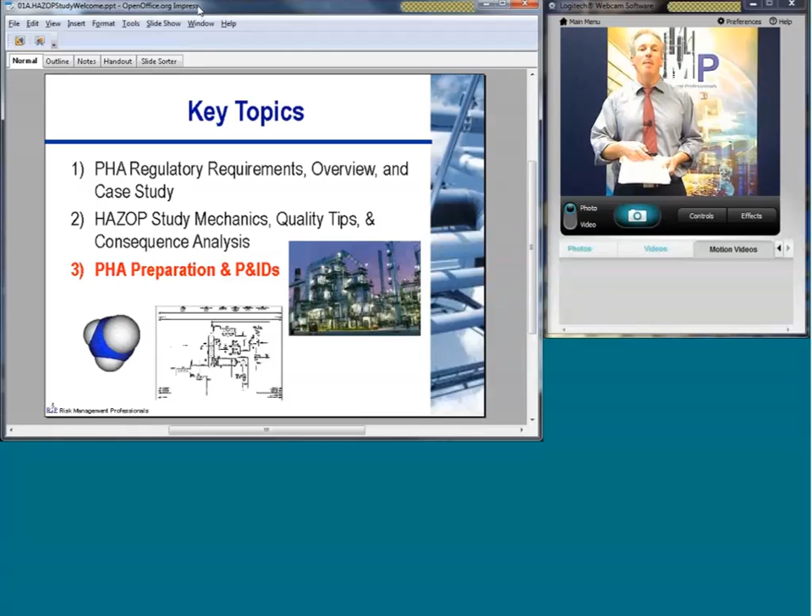Upcoming topics will include scenarios, workshops, facilitation tips, more workshops to really have everything come together, how to integrate layer of protection analysis, safety instrumented systems, safety integrity level issues, QRA, and pulling all that together for an overall HAZOP study that integrates with a lot of the other things you may have to do for an overall safety management systems program. Also want to talk about revalidation, that's another real key issue.

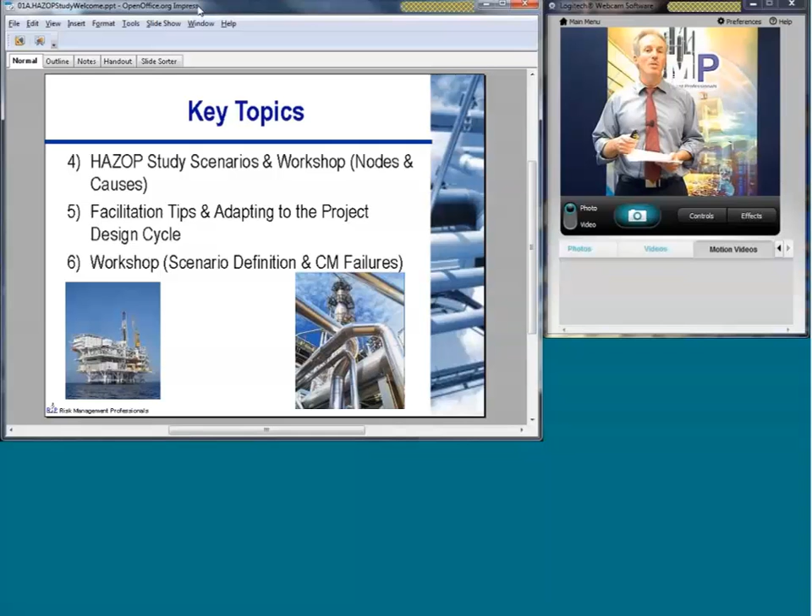That'll be coming up in Module 9. Team facilitation, we're going to get something very interactive going for Module 10. Then Module 11 will look at a lot of key issues that classically hadn't been done very well: human errors, human factor issues, facility siting.

Also, how do you integrate hazard and operability studies to various stages of the design cycle for a plant. And also, Module 12 will close with a lot of specialty items. A lot of people use double jeopardy inappropriately - how do you integrate those concepts into HAZOP studies, looking at multiple consequence categories, etc.

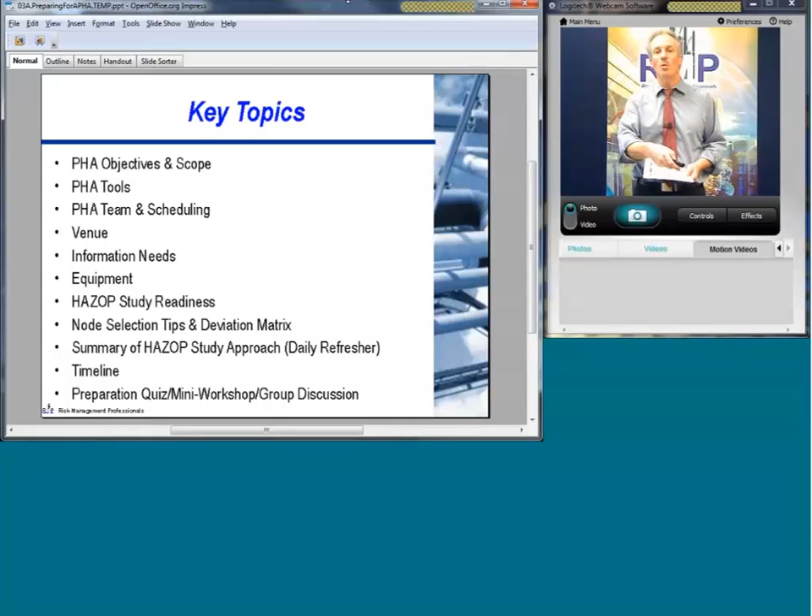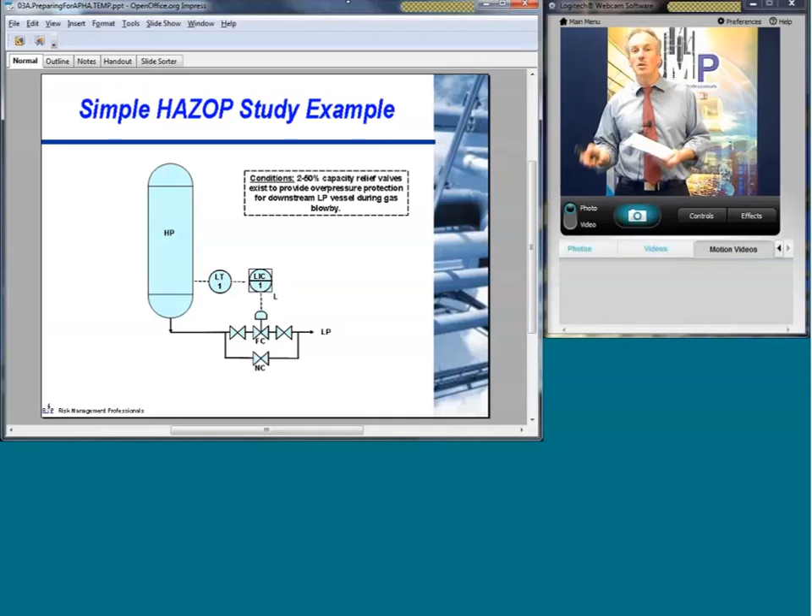So let's overview. I want to give you a big picture again so we don't lose sight of where we're going with the hazard and operability study. Again, you've designed a system, you use piping and instrumentation diagrams or some other mechanism to design it to achieve a certain function. Like I said, P&IDs, which Judith will talk about more, emulate the function of the system. So what you want to do is translate that into looking at it another way and how it can break or how can you fail the system.

Use a deviation matrix as we talked about before, apply various guide words, combining no with process parameters like flow to get deviations like no flow, that can lead you down a path of challenging the system and uncovering potential vulnerabilities. The hazard and operability study has a rhythm to it.

There's a very systematic approach to making sure that you ferret out potential hazards, segmenting things in the form of nodes, applying process deviations, looking at various causes that can go wrong, looking at the consequences of those causes, and developing a scenario so you can understand how likely the event is, how bad the event is, and gauge with the team whether the safeguards are adequate or whether you have a vulnerability that you need to address.

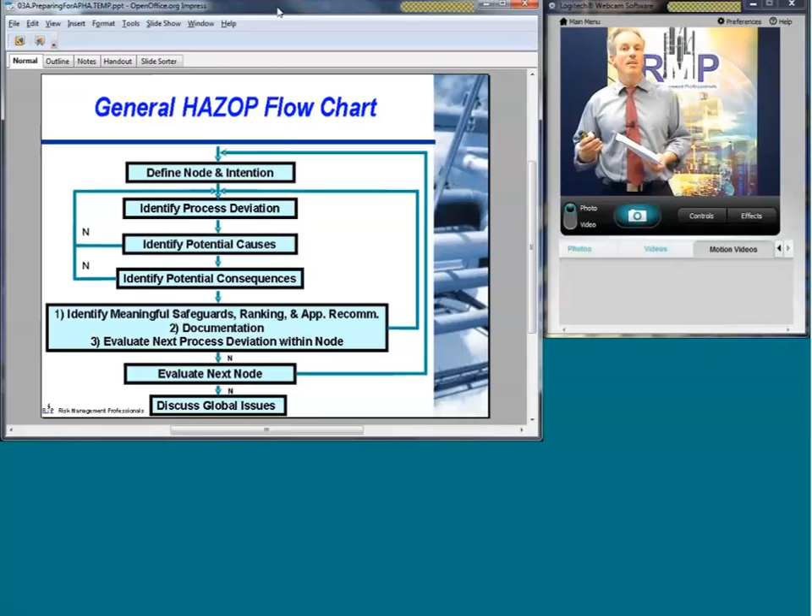It gets documented as part of a table typically, where you list out the causes, consequences, safeguards, and any weaknesses, or any recommendations to address potential weaknesses.

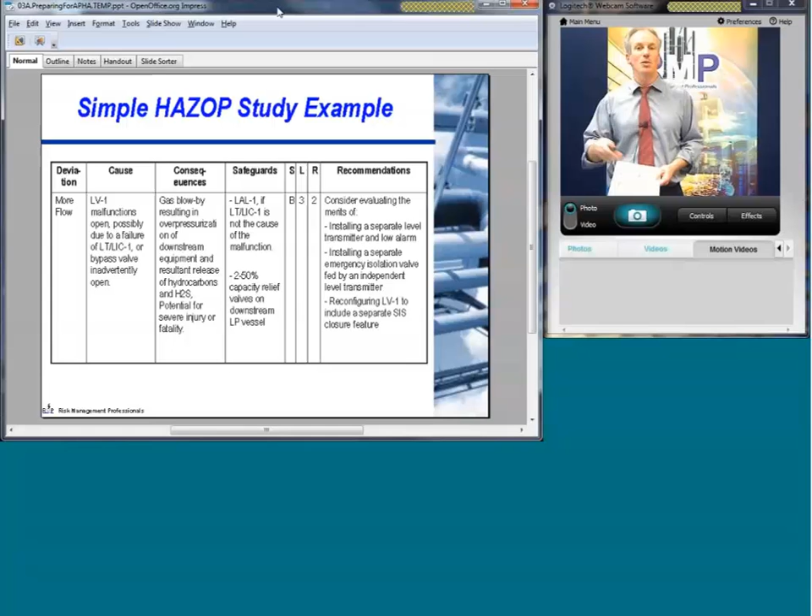So what you're trying to do is use that design information, how the system works. You're using a tool like one of the process hazard analysis tools, like a HAZOP study, to challenge the system, to make it break on paper, of course, and identify what potential weaknesses there may be so you can fix that. So you're looking at causes that can lead to safety or environmental hazards.

You're trying to recommend changes or things to address potential vulnerabilities or weaknesses, and then you're trying to provide documentation that provides background for those recommended actions. So that's the objective: you're trying to go from design information, use a PHA technique, challenge the system, and uncover weaknesses.

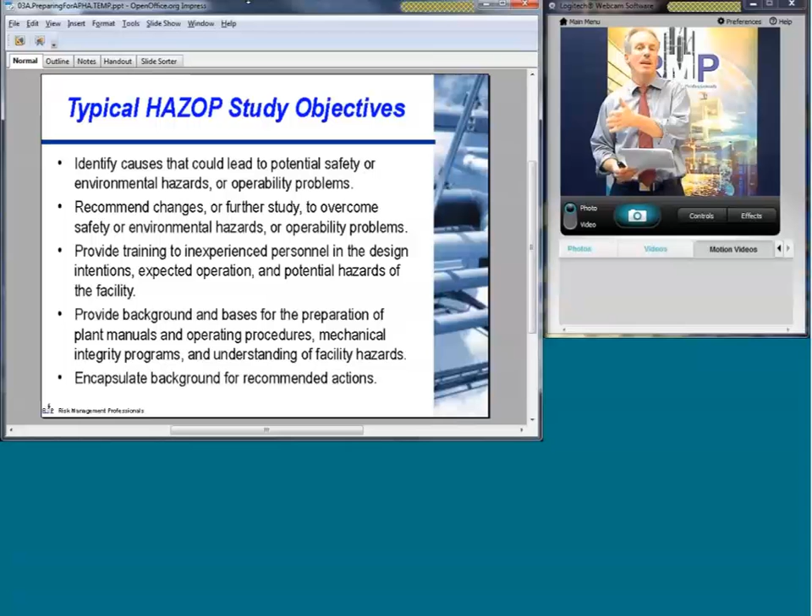So the whole theme for this is how do you do it successfully? Well, half of success is preparation, doing things up front so you can effectively use your team and effectively uncover weaknesses. If you go into a PHA of any sort, especially a more complex one like a hazard and operability study, and you're not prepared, you're going to be wasting a lot of time. You may not get the results you want, and you may not have uncovered potential vulnerabilities that can wind up injuring somebody, causing major plant damage, or having a significant impact on the environment.

So to achieve this, preparation helps you get a high-quality PHA. It helps you effectively utilize the team, and it can also make sure that your session time is well used.

A good preparation for a HAZOP study not only can improve quality, but it can also decrease the overall amount of session time that you may be encountering. So let's look at the key steps for preparation.

First of all, it's defining the objectives and scope. If you don't know where you're going, how are you going to get there? A PHA can be done at a very high level early in the design stage, and I did one for a hydrocracker. We flew through it in just a couple of days, looking for high-level issues very early in the plant design stage so you could make major changes in a very cost-effective fashion. That was the objective.

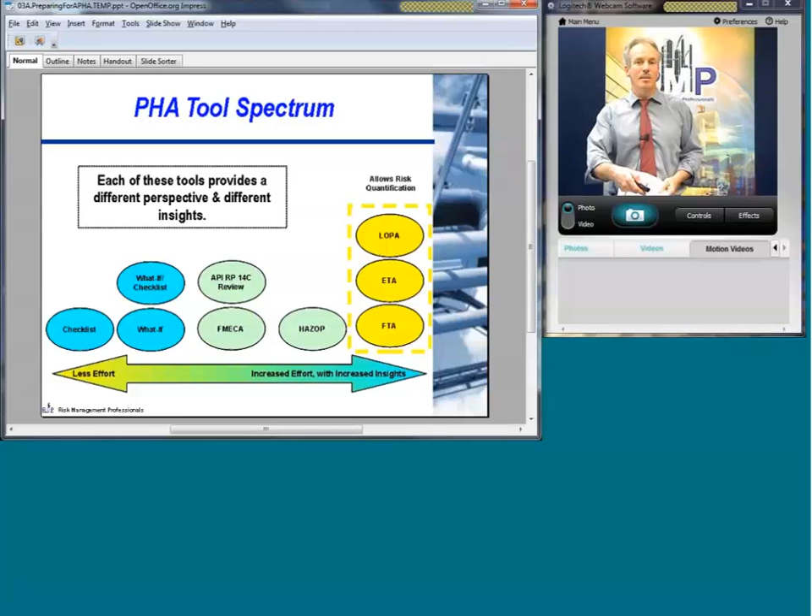Okay, step number 3, after you define the objectives, you know what tools you're going to use so you can start arranging the tools, is the team. The team is where it's going to make or break you. Getting the right people, having the right expertise there is absolutely critical.

There are regulatory requirements with who has to be there, but even beyond that, don't just shoot for the minimum. Think about what's needed, what are the capabilities of the personnel. Each individual on the team is going to have a certain role and responsibility. We'll talk about that in a second.

And it's important. These are some of the busiest people. The best qualified people are going to be the busiest people. So you're going to want to schedule them early, make sure they're calendared, and that can be a real challenge sometimes. And also, you've got to let people be aware that they have to be there for the entire time.

A team session for a PHA like a HAZOP study, you can't have people coming in and out. If people miss key parts of it, they'll just come in later and start asking the same questions, or you may be missing their critical insights at a time when you really need their support.

So what does the team look like? From a regulatory requirements perspective, you have to have representatives from engineering, operations, and maintenance. You have to include a person who has knowledge specific to the process being evaluated. It doesn't help you too much if you're working on a hydrocracker and then you've got a brand new engineer on your team who's only worked on your wastewater treatment system, that just isn't going to fly. It's not going to be a good use of time. Instead of having a robust and worthwhile effort that provides good quality results, you're going to end up wasting a lot of time and maybe even having to redo it.

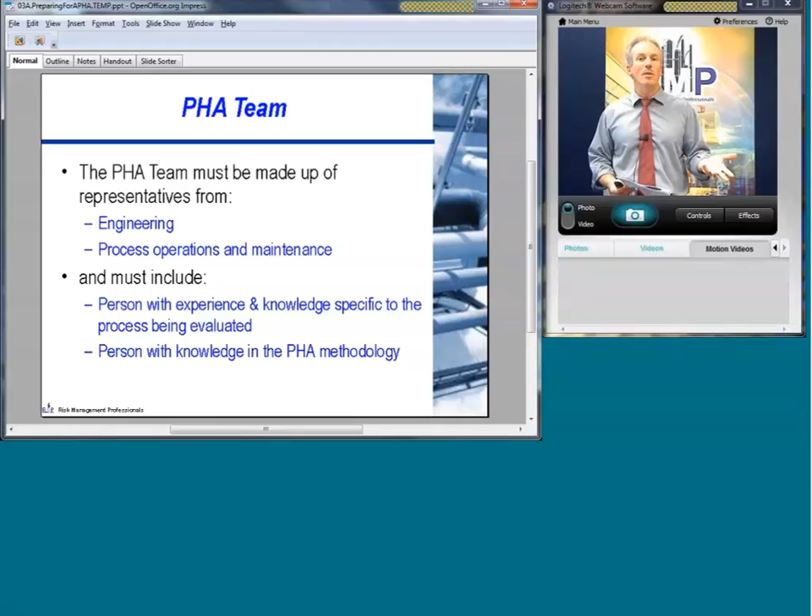And of course, at the bottom, somebody knowledgeable in the PHA methodology. We're applying hazard and operability studies consistent with a lot of experience base that we've acquired, and also consistent with CCPS guidelines for hazard evaluation procedures. This is the mainstream of activity. However, as engineering consultants in the area where we get out and help a lot of people with HAZOP studies, we see all sorts of applications that'll make your eyes pop out. You won't even believe what people have done and called a HAZOP study or called a PHA. You've got to have somebody who knows the methodology, and we talked in the last course module about using endorsed methodologies, so that you've got an analysis that's robust and meets regulatory requirements.

Key people on this team, as I mentioned, you've got to have a process or project engineer, operations, maintenance, and a PHA facilitator. Those are the ones in blue. They've got an R after them as required by regulation. These are the core members of your team. But if you're organizing this and you're facilitating a hazard and operability study, you've got to make sure that you've got the expertise that you need to get the job done.

A larger effort, you'll also want a team recorder or scribe. We'll talk about that in a second. They can be pivotal to making the team sessions go smoothly and maintaining momentum. An instrumentation specialist may be needed. Safety and fire protection experts and other expertise may be really critical for your PHA team. Based on the objectives, you have to decide what you need.

Also, optimal team size. Sometimes it's tough getting an operator and an engineer at a plant site who's got time to sit through these. That's a minimal amount of individuals. That's even a little on the small side. You usually want an optimal team size of 6 to 8 people with various expertise and people who have the horsepower in project management or in operations to endorse projects or give valuable insights.

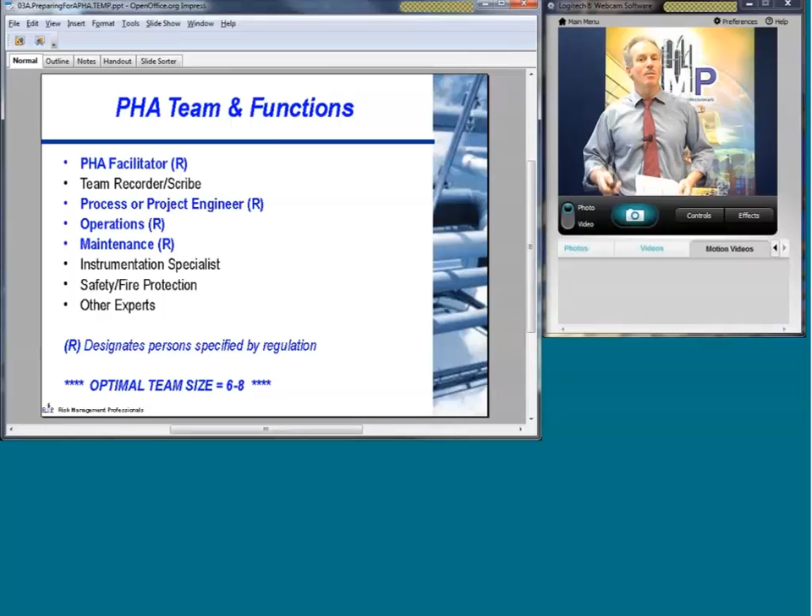If you get too many people on the team, they spend a lot of time interacting, they bring other agendas on board, and you have a harder time reaching consensus the more people that you bring in. So unless somebody has specific expertise that's needed, they really shouldn't be present for these PHA team sessions. I have had sessions that have looked at very acute, very critical processes that had a lot of people's attention. I've had upwards of 30 people in a HAZOP study. It's very challenging trying to manage that, trying to reach consensus, and trying to move that forward. So unless somebody really needs to be there, you just don't want them as part of the team.

Key team members, their roles, the facilitator. The facilitator has to organize. They can have good technical knowledge. In fact, we'll talk in a few minutes, it's actually very important to have good technical background. But their primary responsibilities are to organize and push the team towards finding those vulnerabilities or weaknesses if there are any.

The facilitator usually ends up, because they have the vision for what has to happen and for the job to get done, being the one responsible for preparing, making sure the objectives and guidelines are met, scheduling, location of facilities, team selection, all the things that we've been talking about and are going to talk about a little bit more. The facilitator needs to provide team training. When you get a fresh team, you don't know what kind of hazard and operability study approach that they've seen before.

They need to make sure that the team understands the objectives, and all these things are conducive towards making sure that you can maintain schedule and keep momentum. If you spend too much time on things, you find that the team just goes brain dead. They zone out, they're not contributors.

Maintaining momentum of the sort where they can really think and flush out potential issues is a critical job for the facilitator. The facilitator can also support tracking of actions, and also qualifications, experience, and background. Training, of course, is critical to make sure you've got a robust and high-quality PHA.

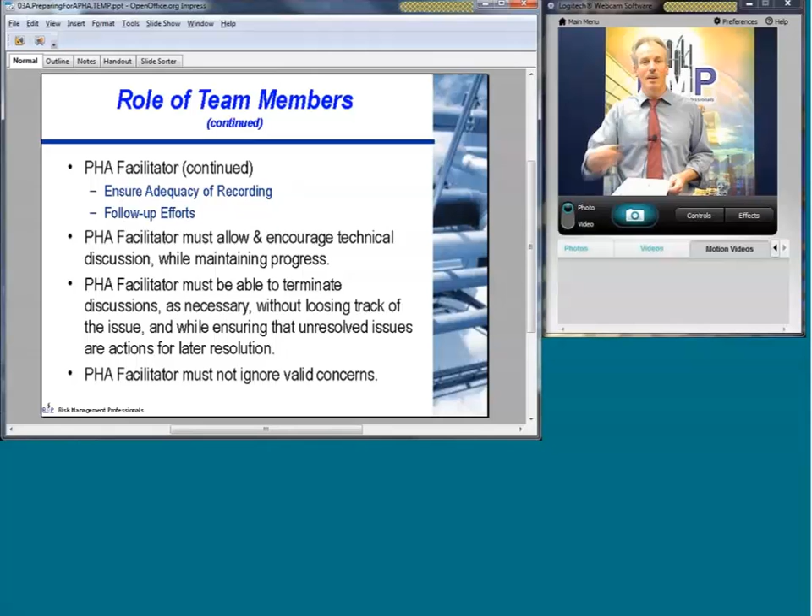What is the scribe doing? Well, a lot of people say, let's just grab a secretary. But the fact is that they have to be qualified and understand what the team is doing, because they're going to be translating all these discussions into the documentation.

Now, are the team notes the final documentation? Usually not. Usually you want something a little more robust. You're double-checking tag numbers and making sure that quality is there so you can understand and decipher it later, in case you need to do updates to support your management of change program or future revalidation efforts. So doing a good job on this documentation and having a good quality scribe is very important.

Other experts that are going to be there have to have suitable qualifications and experience. Like I mentioned before, you don't necessarily want to get somebody from another process unit who has no idea what you're talking about. That's not going to be helpful, and you're just going to have a lot of follow-up items, spending a lot of time trying to sort through things you don't understand.

What about vendors? A lot of times you get skid-mounted packages, like the lube oil systems I mentioned before, where it's very simple. How many lube oil systems are there out there? People should know how to design it. Given the objectives of the project, you have to decide: do we want to do an in-depth evaluation of that, or do we want to trust the vendor to give us a package that's very reliable and has no weaknesses in it?

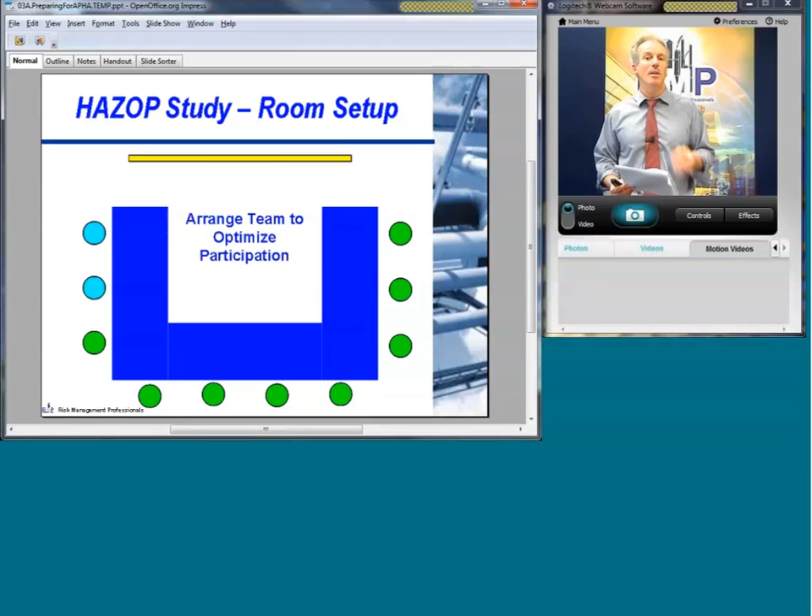Step number 5, getting key information together. The focal points for PHA, because you're going to be looking at design and key design information, are your piping and instrumentation diagrams, your P&IDs, and also process flow diagrams.

Their accuracy, doing a good job up front, is critical to the success of the HAZOP study. Let me repeat that: the accuracy of P&IDs and process flow diagrams is critical for the success of your process hazard analysis. People can't just grab the P&IDs from 5 years ago and go, let's go HAZOP.

Somebody needs to field verify them, make sure they're up to date, make sure they're accurate. Otherwise, what you're going to do during your HAZOP study, instead of uncovering weaknesses and using your expertise effectively, is have a ton of discussions about, 'gee, is it like that now?' or 'I thought we removed that tank 3 years ago.' Those kind of things really can derail a HAZOP study.

I've been in HAZOP studies where the drawings promised were correct - I was told they were field verified. And I'm asking questions, and we're documenting things, and 10 minutes into it, I'm looking, and they're just blank stares. Somebody finally says, 'we removed that vessel 2 years ago.' These kind of things are just an unacceptable waste of time. It's unacceptable if you're trying to achieve a quality PHA.

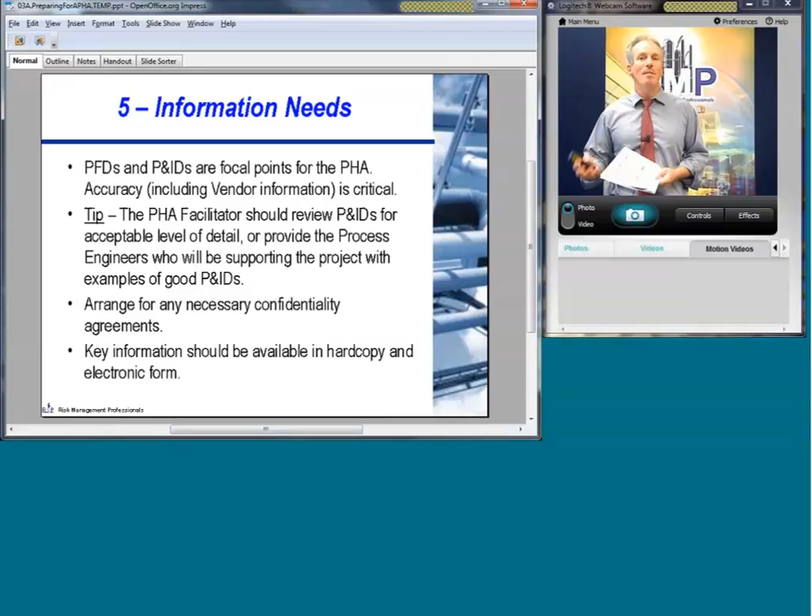This is a nice little checklist of what I call desirable information, or things that you may want present in the room or make copies of for the individual team members.

P&IDs are fine. As I mentioned, accuracy is critical, but here's a tip: if they're not 100%, if there are minor differences that you can clearly communicate during the HAZOP study, let it go. Have a master copy on the wall of large-size drawings, mark it up, have the process engineer mark it up. Everybody can look at it, understand the little change, and factor that into your HAZOP study, and then have those drawings become part of your documentation. That's an acceptable way of doing things. The proof of the pudding is whether you can uncover vulnerabilities and are doing a good, thorough job.

Also, the H means high priority. On the second bullet, all these H's are high priority. Process flow diagrams, and other high priority items, are site layout drawings.

Even more importantly, for older facilities, we find a lot of interesting insights when, after going through the cause-by-cause HAZOP study, we do an overall fire protection review by laying out the site plan and talking about where a major fire might occur, where the monitors are, where the evacuation points are, where the safe assembly areas are—site layout drawings really help a lot with that. For older facilities, the paradigm of good practice changes over the years, so you're going to find significant vulnerabilities just with a good, thorough inspection of your site plot plan.

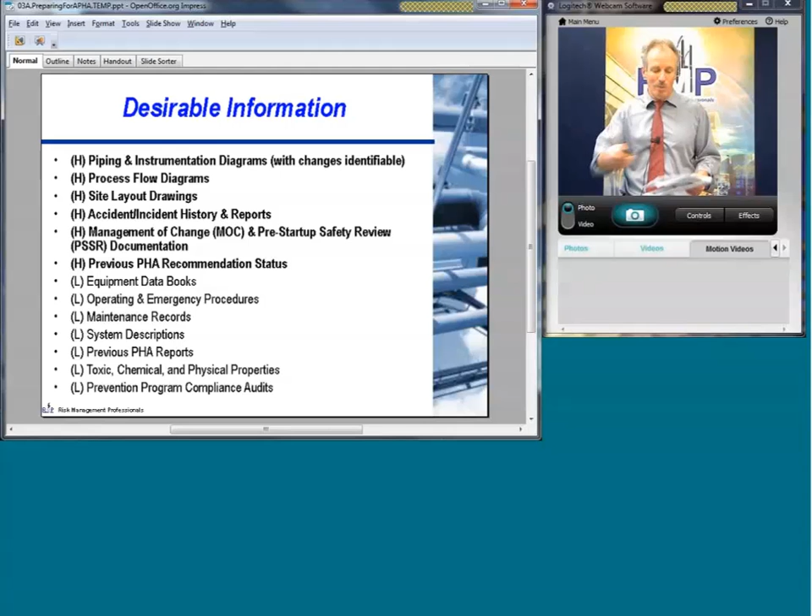So those are a lot of the key information needs that you'll want to have requested, gathered, and available as part of your preparation activities.

Step number 6 is equipment—basically getting all the pieces together so that things work and you have all the tools that people are going to need during the sessions.

One of the considerations is electronic communications. Over the past few years, when you're having a tough time getting busy people together for your HAZOP study, electronic communication packages like GoToMeeting and WebEx—you've probably seen those advertised—along with a number of other packages, can be used very effectively to get groups in different physical locations. We've had a lot of success running very good, high-quality HAZOP studies by setting up interactive video and interactive computer screens that everybody can see. You may even run two at once—one to look at the P&IDs, and one to look at the HAZOP study session notes.

So there's a lot of good things you can do that are out there. However, beware, this involves computers. Computers always look for opportunities to foul up, and it involves technology, bandwidth, internet connections, and a lot of logistical items that you want to make sure get prepared up front.

This is one area especially if you're trying to arrange something like that, you want to make sure all of the I's are dotted and T's are crossed with respect to the details needed for setting this kind of system up.

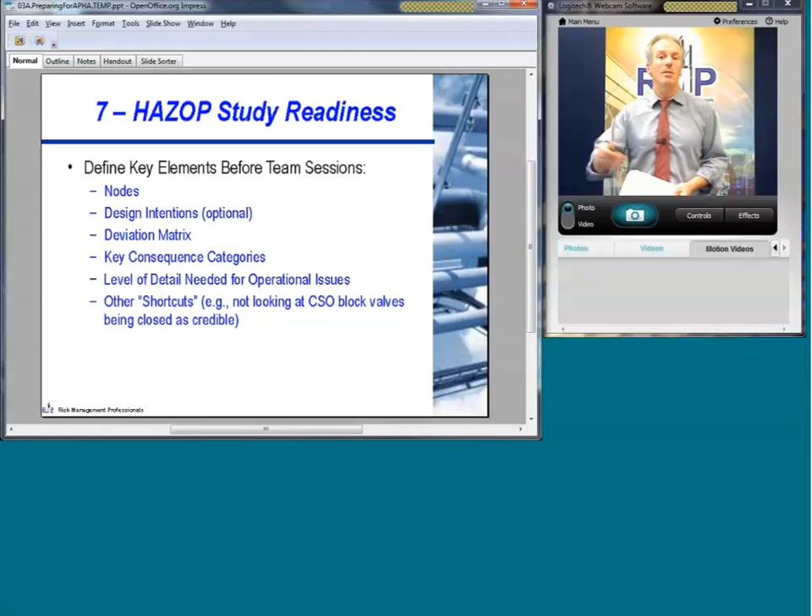Also, what we like to do is get key causes preloaded. The facilitator and/or the scribe, looking up front at the drawings, identifying key control valves. You want to make sure you look at their being closed as a potential causal event.

Ruptures in heat exchanger tubing, relief valves opening — basic things preloaded can help provide a structure you'll be able to easily update for the next 5-year revalidation. It also means key things are going to get covered. You don't necessarily have to reinvent the wheel in each case, and the team can focus on things that may be a little less conspicuous.

Maybe some subtleties that somebody from the outside, the facilitator, may not have noticed. So preloading causes can provide a lot of benefits and save a lot of team time when it comes down to actually doing the team sessions.

Another tip: the first day, something or many things are going to go wrong — equipment, room setup, there's another meeting there, you have to go to another room, whatever. Get there early. Leave time for problems, for setup. If you told the team you were going to start at 8 o'clock, be ready at 8 — make sure the software, all the physical items, everything else is ready to go. After the first day it usually gets a lot easier, but that first day, leave time for problems.

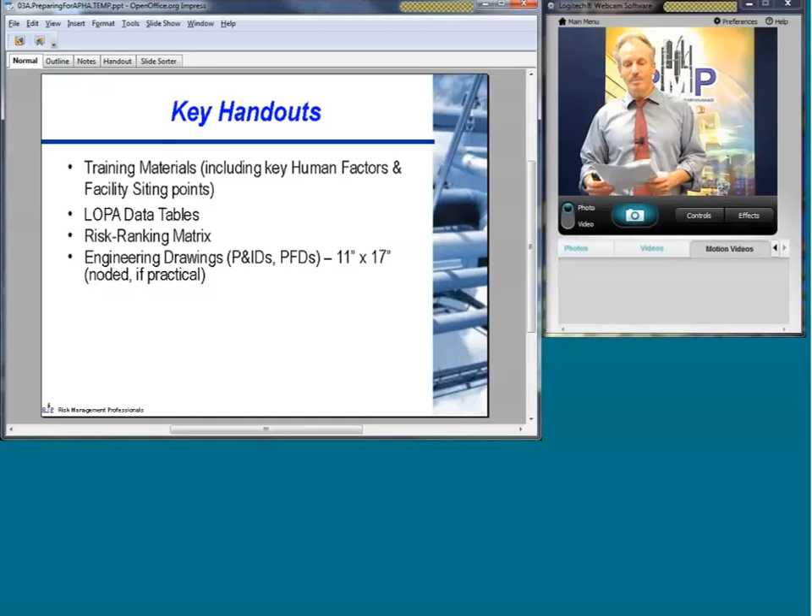Also, key facilitator preparation issues. Again, the facilitator doesn't have to be responsible for engineering expertise, but reviewing the drawings up front, knowing the process, maybe asking questions of the key process engineer - that's going to be super helpful so you can do your job as a facilitator to guide the team, think ahead, and push them in the direction where they need to go.

I definitely do not endorse the old school approach of, you know, I'm just a facilitator, I'll ask the no flow, more flow questions, and the team has to do everything. The team is responsible for that. You as a facilitator are responsible for guiding them, but you can guide them better if you really know the process, or at least are fairly familiar with it by reviewing the technical information up front.

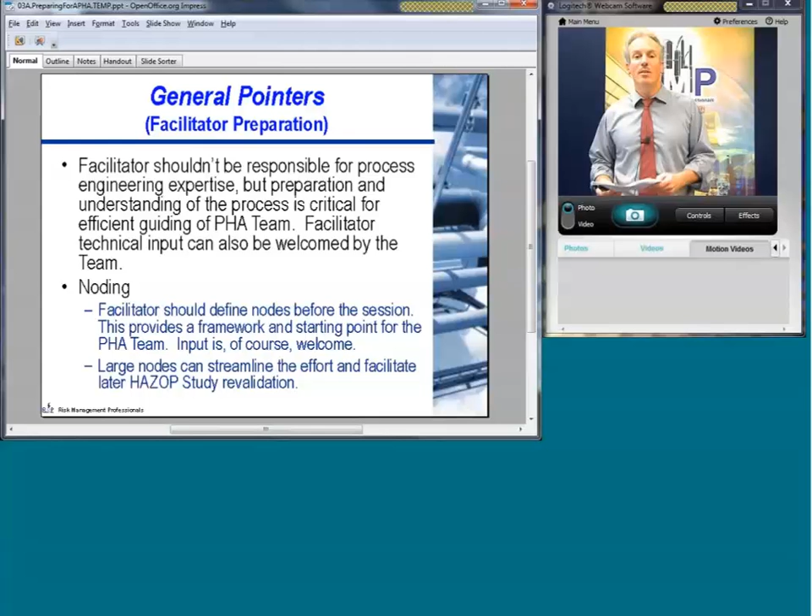Cause definition - we talked about the advantages to that. Also combining causes with identical consequences: if you've got a series of valves, put them in the same causal event and use the most limiting likelihood. If a control valve is bounded by 2 block valves, look at the causal event as the control valve fails closed or the block valve is inadvertently closed, and there may be instrumentation associated with that too, so you may want to say, possibly due to a failure of the level transmitter. Combine this together because you're not going to have new insights - you're just going to be burning team time by separating those apart.

Also, if you're doing fairly familiar equipment, whether it be a push-pull system on a blanket gas for a feed tank, or a lube oil skid - if something is close to what you've worked on before, go ahead and preload that. The team will appreciate that you're drawing on insights and they don't have to do everything from scratch, so they can focus on the hard stuff.

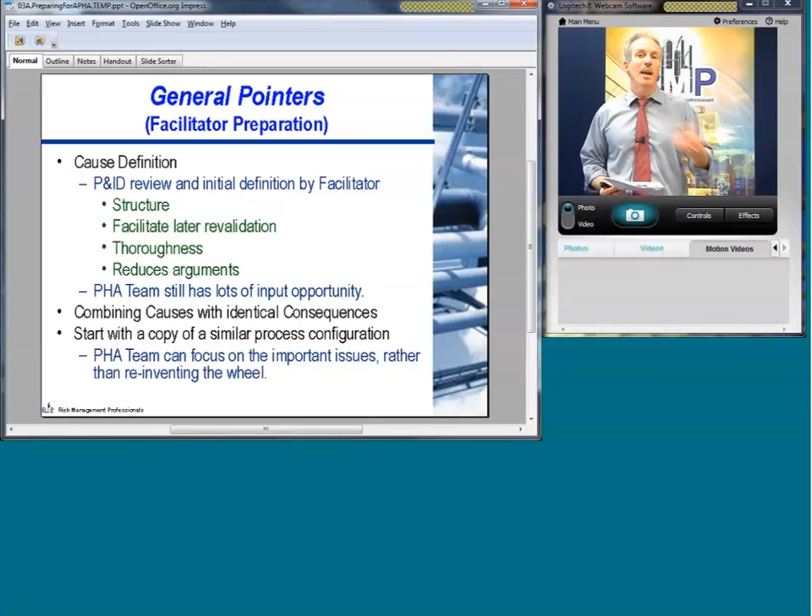Node selection tips. This is really important for getting the team started. Defining it before the PHA session is really good. Typically, it's where the feed enters the plant, then following the process through the product leaving the facility, including major vessels or equipment, covering auxiliary systems in separate nodes, and making the nodes as large as practical.

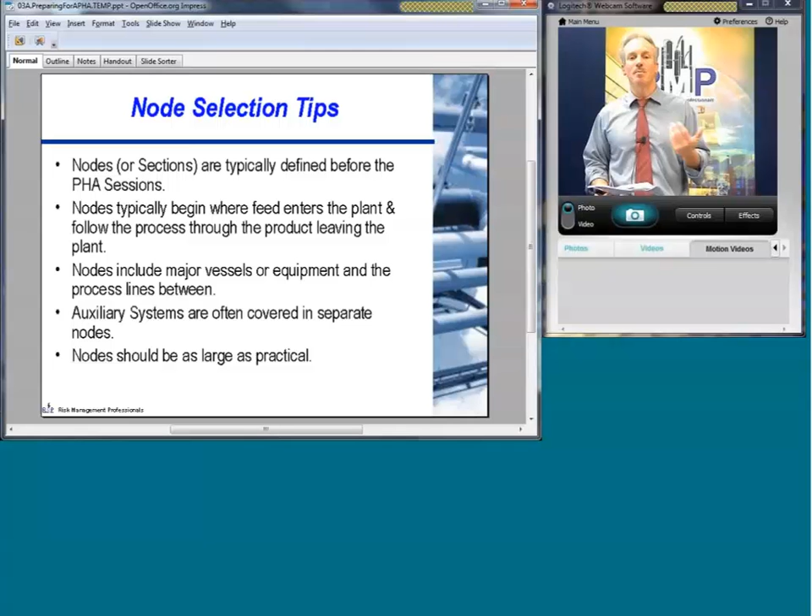I wanted to give you a couple of good and bad examples. Here's a good example of node selection. On the left, you see a blue process vessel feeding the suction of a pump through a heat exchanger, a level control valve, into another vessel. When you're going through a HAZOP study, you remember the deviation matrix.

You're looking at no flow, more flow, high temperature, low temperature, high level, low level. The blue area really encompasses all that - you're looking at the same process area, so keeping the team in that area and thinking about it from a fairly holistic perspective as you go through the deviation matrix will make sure they can find things later easily to update it, and they're not looking at the same kind of thing over and over again.

For example, if you were to split the blue area into 4 different nodes, and you start the first one with the process vessel asking about high and low levels, when you start talking about the next node, which might be the pump having failed to operate, you're going to also talk about that as maybe having a high level consequence, or a high-level result that may lead to problems.

By splitting it up too finely, you're going to find yourself being very redundant in terms of the questions that you ask. So the blue area, keeping all that together, is a good example of how to make a node. If you were to split those areas into different pieces, this would be a bad example. It can lead to a lot of redundancy. And the worst thing about redundancy is you can ask a similar question to a team where they should be giving you the same answer, and they may give you something totally different. Especially if you haven't prepared properly or understand the system, you may think they're talking about a different type of scenario. So understanding the system, good node definition allows the facilitator to pull all this together and make sure the team can focus on things once and do it comprehensively.

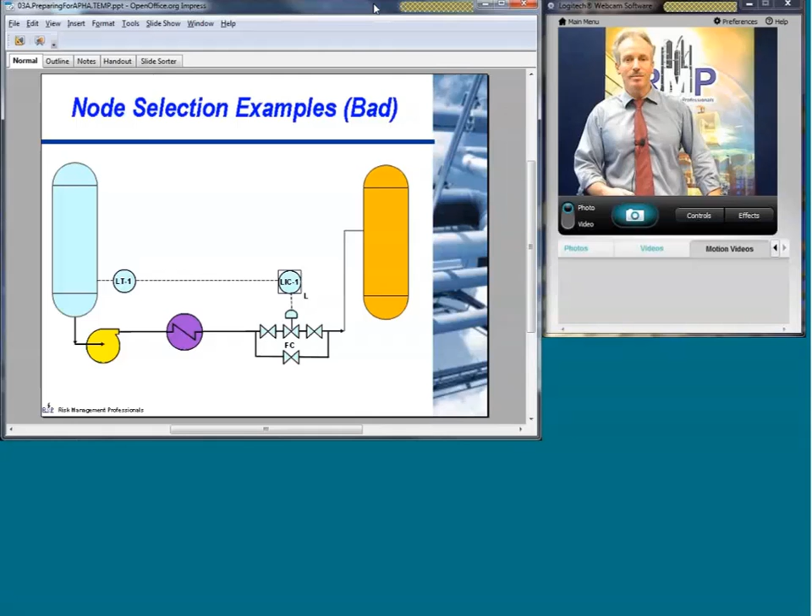This is a fairly complex example that actually worked well for one of the HAZOP studies we did. This is the front end of a hydrotreater. Basically, you've got a feed tank going through a pump, flow control through a heat exchanger, heat recovery exchanger, through a main heater, H-1, through a reactor, and then you're taking the reactor effluent back to the recovery exchanger. And here on the feed tank, you're also having a push-pull system to control the pressure of the blanket gas.

This looks very complicated, and when you first look at this, you go like, why would you make one node out of that? Well, the reality is for these types of processes, because you're dealing with high temperature, high pressure situations, you really don't have a lot of active components. And that's typically what you look at for a HAZOP study - active components. So by grouping this one flow stream at the front end of the hydrotreater as one node, basically you look at the high pressure, low pressure deviations and cover your push-pull system on top of the feed tank.

You look at high flow, low flow when you're looking at the pump itself, the flow control valve, those types of active components. You may look at temperature excursions in the reactor or issues associated with the heat recovery exchanger and heater 1. So all those things are pretty much encompassed by a holistic discussion, and this will work very effectively for something like a hydrotreater where you're dealing with a single flow stream and very few active components.

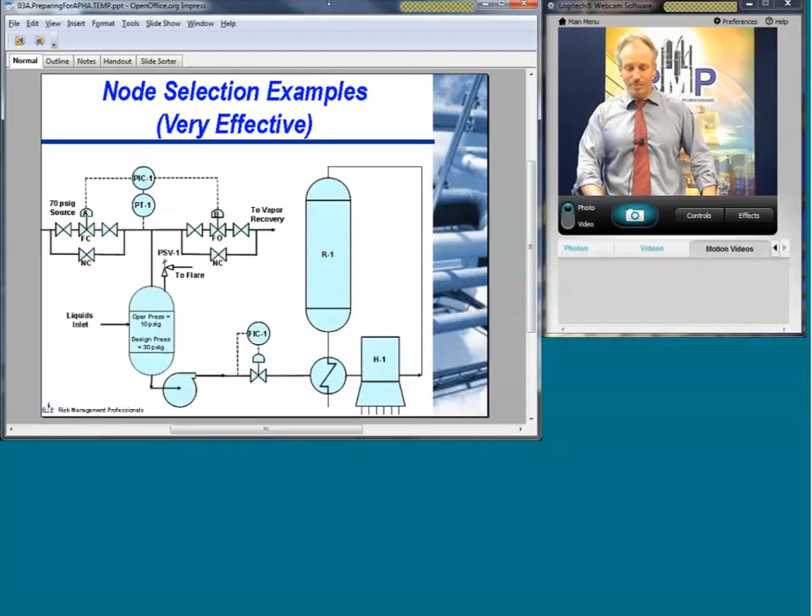Other node selection tips - I'll just throw out my own two cents with respect to colors. Minimize the number of colors that you use. If you make them too small, if you use like two highlighters, you're going to get a lot of mix-up for the nodes. But a lot of people with better color sensitivity than my eyes will use one of these highlighter packs with ten, a dozen colors. And especially after it's aged, or you try to pick it up for revalidation, or especially after it's Xeroxed, or even if it's scanned, a lot of those differences that you might have looked at when they're fresh...

...get totally lost, and you may be looking at a scanned copy five years later for your revalidation, and you may not be able to see the difference between aqua green - I don't even know a lot of the colors - but like an aqua color or a light green or something like that, and it's really not going to be that helpful. So having a set of colors that are very distinct is very helpful.

Also, for documentation purposes, if the facilitator is going to highlight it and note up the drawings, doing it up front with a PDF file or in a CAD layer can be really helpful.

I mentioned also, I was going to show the deviation matrix again. This is a good example of one that's very functional. You notice that it focuses a lot of things. We tend to do flow up front. In fact, no flow covers a lot of the key issues that are going to come up.

And then if you get to a temperature excursion and you've already looked at the effect of a no-flow case that caused that temperature excursion, why do it again? If you did it right the first time, just go ahead and reference right back to it. So having a set of guide words that's very functional covers a lot of the areas. This is a good example of one that works very well for us.

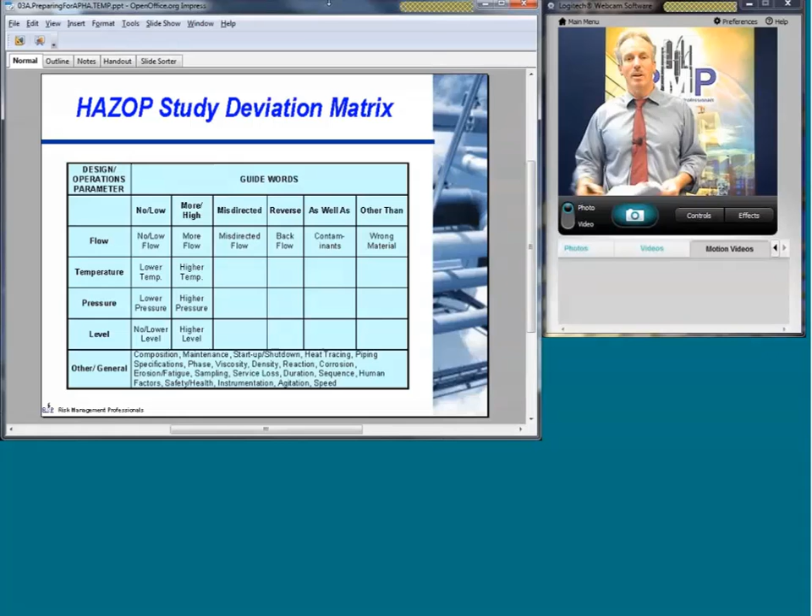Other resources for the previous course module, I also provided consequence examples, risk ranking matrix samples, also general issue examples and global issue examples that you can also reference and bring into your HAZOP study.

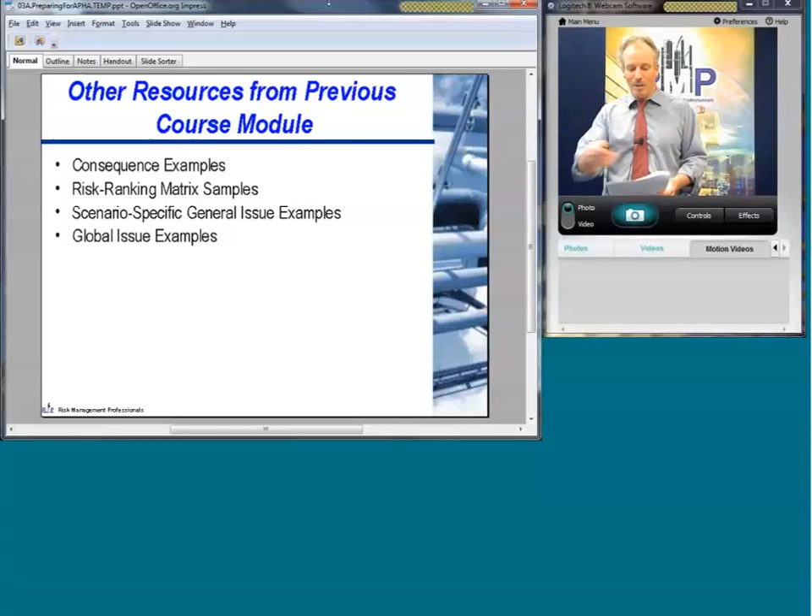And also what I wanted to provide in terms of tools and reference materials, this isn't a preparation step. This is just a little added bonus to you guys.

What you're going to find as a facilitator is that the initial training materials are good, but some people don't think well in terms of failing the system or having a component malfunction. They think more in terms of the system working properly. A lot of people have trouble thinking about the ultimate consequence concept, where you're not thinking about safeguards, and then you bring the safeguards later and document them so you can identify if there's some potential vulnerabilities or other safeguards that you need. So I find it at least daily, and for some teams almost every other hour,

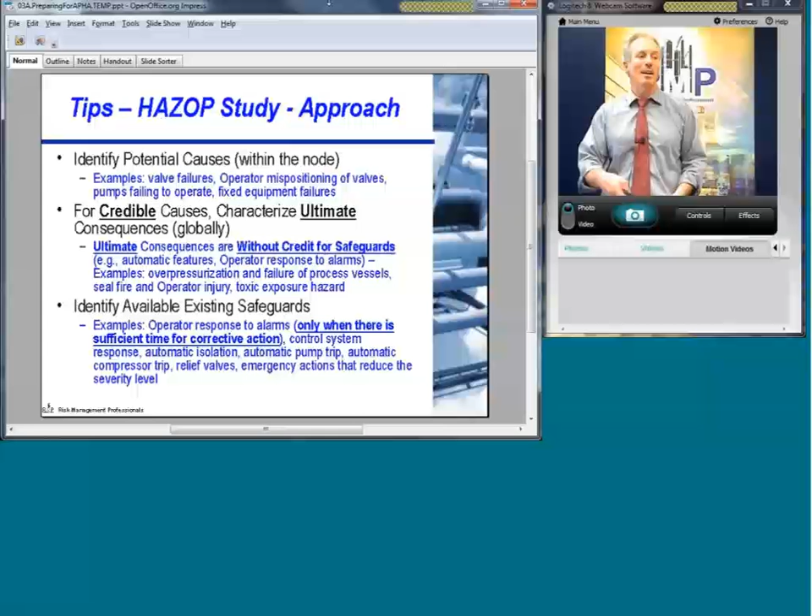I have to give them a little refresher. So here's my little 2-page refresher where I provide the team with a little update just to keep them synchronized and on track. So anyhow, this is for you to use. I find this very helpful to do at least once a day, and for some teams, a lot more often. We talked about all the different preparation steps.

Let's talk about timing. You may need a lot of lead time for these kinds of things. Defining the objectives and scope up front—sometimes you want to do that 7 weeks or more ahead of time so you know where you're going and can start asking for the right kind of information, because it will take time to pull all this stuff together.

Team invitations and scheduling usually take 6 weeks. Stipulating the tools to use, figure about a month beforehand in case you need to arrange licenses. Getting the venue up front, maybe about 4 weeks before to make sure you get the area you want. Getting key information after you've decided on your objectives and requested it—you should be compiling this at T-2 or 3 weeks, or else you may have a lot of last-minute problems. Arranging for equipment and beginning to prepare the PHA elements usually happens a couple of weeks beforehand, so you're ready to go when you get your team together for a good, effective PHA.

Now, given that this is a webinar and we're not going to make this interactive, I just want to go over some key points in the form of a quiz that we would normally give for people who attend in person. The first question: the optimal PHA tool or technique can change based on project objectives or type of system. Absolutely true—the tools can change depending on what the needs are.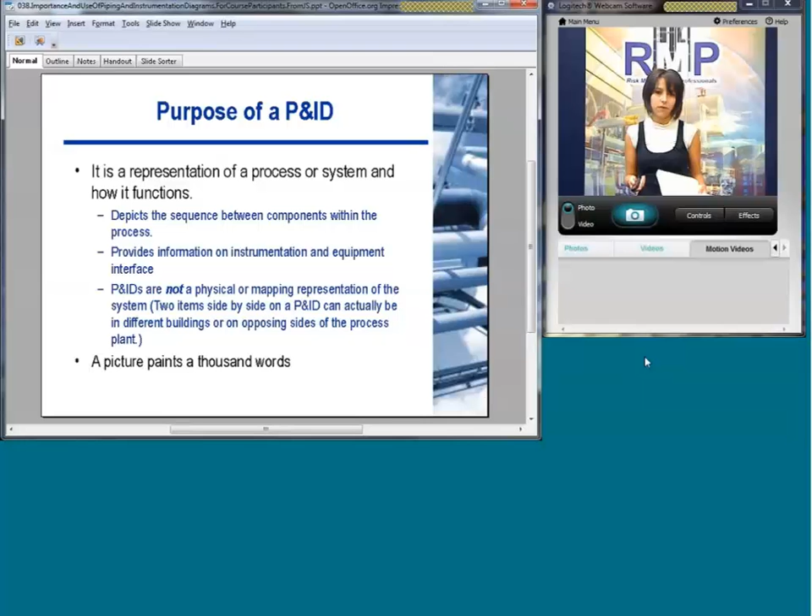Utilizing P&IDs specifically for a HAZOP study, they're definitely a useful tool during a HAZOP study. You want to have accurate P&IDs. You want to have fully developed P&IDs, because this enables the team to understand the process.

When you're in a HAZOP study, as Steve mentioned quite accurately, it can be a challenging job for a facilitator to keep the team focused and keep the HAZOP running smoothly and keep the information valuable and useful. Whatever stage you're at in the HAZOP, whether you're doing more of a HAZOP light or a detailed HAZOP, having complete P&IDs will enable you to document properly and make sure that down the line it's still understandable. So it definitely enables the team to understand the process and keep the HAZOP moving smoothly.

It allows for systematic evaluation based on the representative P&ID flows. This goes back to what Steve was saying about node development. If you actually node out your system and you have high quality P&IDs, this will enable you to keep the team focused and aligned.

Because you're focusing them on a portion of the system when you node the P&IDs, if you have the P&IDs available, you go ahead and node it out, whether it's beforehand on PDF, using highlights to structure your nodes so that the team is all aligned as to what portion of the system you're looking at. This helps really focus the team on where you're at and prevents deviating downstream or upstream, and really helps focus them on the portion of the system you're looking at.

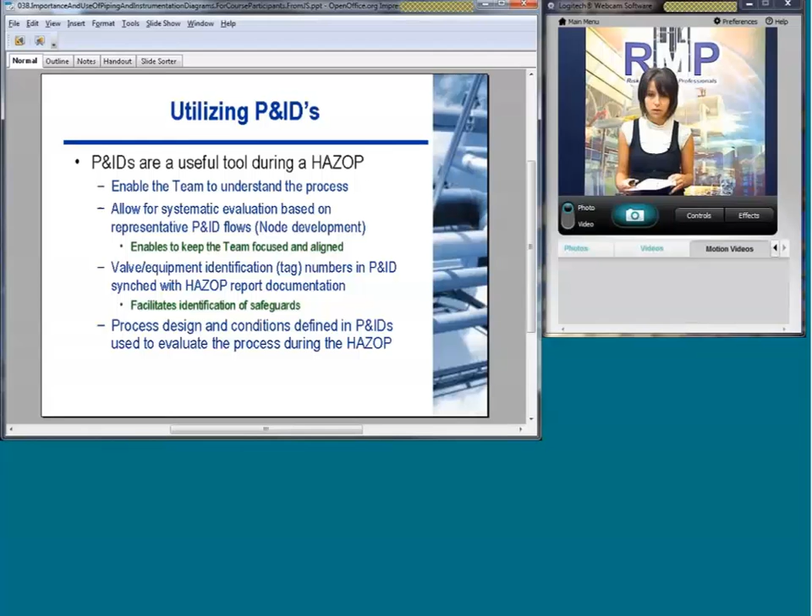Process design and conditions defined in P&IDs are used to evaluate the process during the HAZOP.

Continuing with utilizing P&IDs: they're your main component when looking at the HAZOP in that systematic manner of node definition, then looking at different parameters like no flow, more flow, high pressures, low pressures, etc. But they're limited to the scope of their intention, so during a HAZOP study, P&IDs can also be used alongside other useful maps and diagrams for a comprehensive HAZOP. You don't want to clutter up your P&IDs with excess information, because that would be confusing and deter the team from the usefulness of the P&ID.

So what you usually want to do is have supplemental maps that can be used alongside. These can include process flow diagrams, your PFDs, which are a more general outline of the process flow. They may include some major controls, but not all the controls and valving and detail that a P&ID has. It's more to give a comprehensive understanding of your process flow and a general view, so people can visualize when looking at one section of a P&ID. They can refer back to the PFD to get the general understanding of where they're at and what impacts are upstream and downstream.

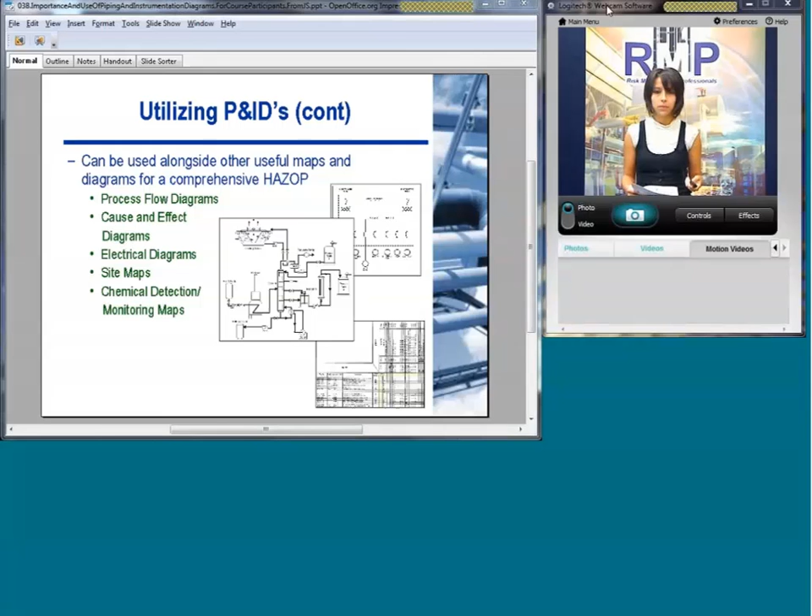So summary of the key elements, bulleted out, are general P&ID layouts, the legend, piping, valves, instrumentation, and equipment. Some of this is going to be pretty basic, we'll kind of just go through it.

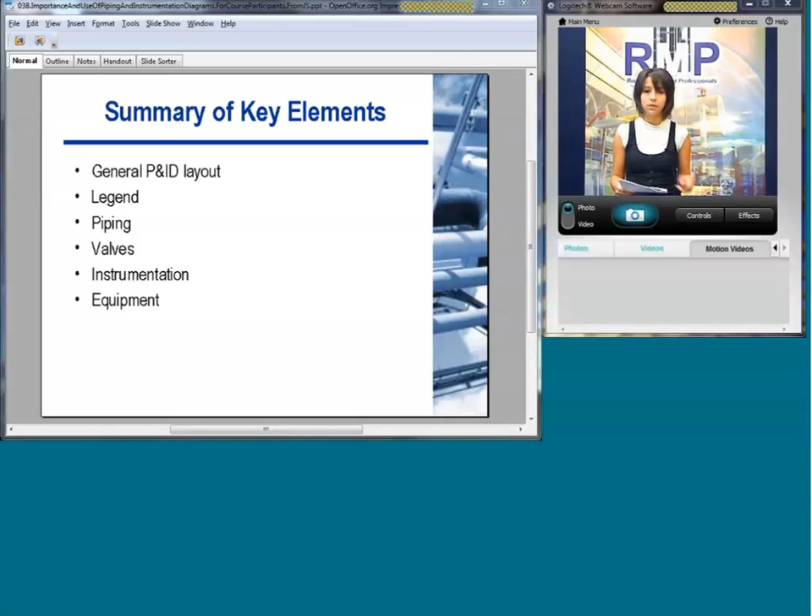The P&ID layout, you have a grid. It's usually a good thing to have, especially if you have a more complex P&ID where you have a lot of equipment and a lot of tag numbers, because you want to keep the HAZOP study team really focused and keep things moving along. A grid is a useful tool because you can go A3 and it serves up its own little matrix, so if you're referencing a tag number and need to get the team synchronized quickly, this is a good way to do it.

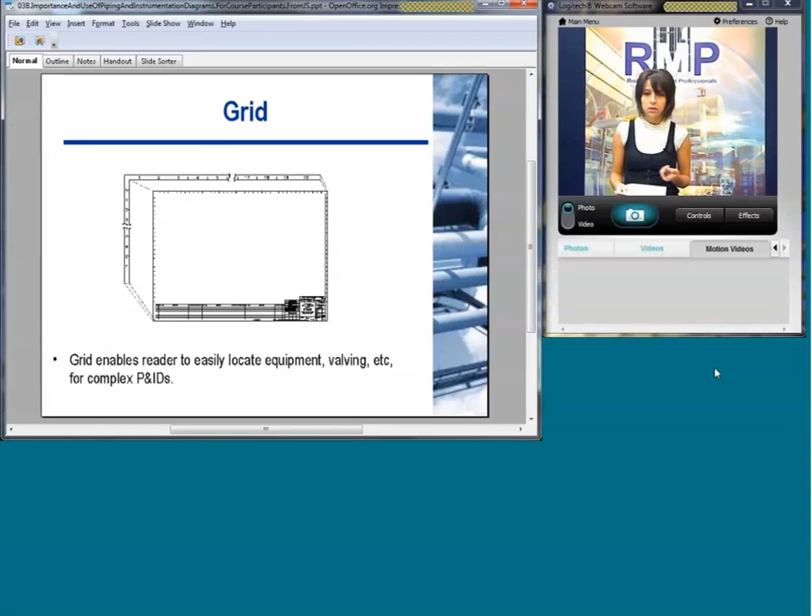Information blocks: the title block enables identification of the system and drawing numbers. For HAZOP documentation this is critical, because if you have a 200-page HAZOP report, this is the basis of finding and navigating through that report. You need to definitely understand where you're at in the system, what drawing you're looking at, and also what revision.

The revision block provides information on the history of changes to the process. We'll go over this more later, but essentially this is key to identifying when it was last reviewed, what changes were made, and it gives a lot of insight during the HAZOP to understand where the process is, what has changed, and if any other revisions need to be made, or if this is not properly updated, that needs to be incorporated for future revisions.

A lot of times you make changes, and it's easy to forget to update that. So it's good practice to always document any change and add it as a new revision. Because if you don't, and you keep the same rev numbers, when you're looking at the HAZOP documentation and someone picks up what's supposed to be rev A, and it should have been rev B, now you have two rev A's. It becomes really confusing because tag numbers don't match up, your equipment may not match up, your lines where they're going in the process don't match up, and it becomes a hard and really confusing situation.

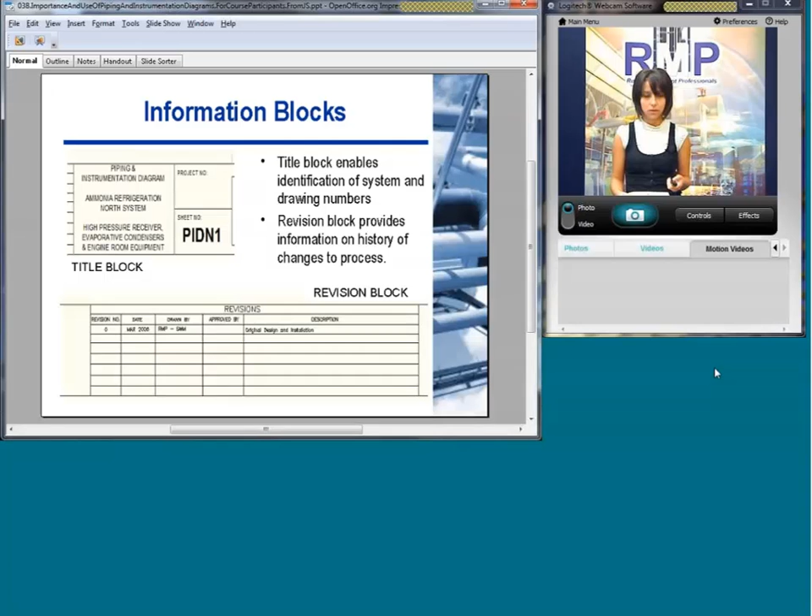P&ID legends. A legend is useful to understand a P&ID. It defines the symbols with corresponding type: piping type, equipment type, valve type, etc. So this is kind of your key.

This is what's going to define what you classify as a control valve, how you depict it, how you designate the symbology for all your equipment, including exchangers and vessels. Every industry has different names for their vessels, and there's only a limited amount of vessels or equipment that we have, but each industry tends to call their vessels something slightly different based on what process is flowing through it. So a legend is really what helps merge all of this information specific to the facility and helps as a communication tool for aligning everyone.

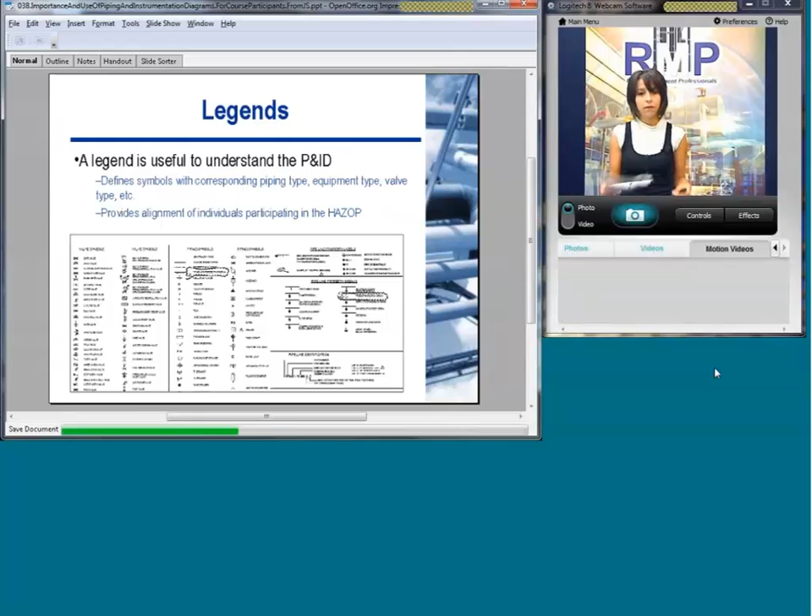What happens with this is, during a HAZOP you have facility personnel, maybe the facilitator, maybe some contractors, and everyone might have an understanding of P&IDs but their own interpretation as to how you designate a pressure relief valve. Do you call it a pressure safety valve? A pressure regulating valve? A pressure control valve? There's different equipment and different names for each piece of equipment or valve. Having that legend really helps synchronize everyone - oh, okay, I see what it is. So when you're going through the HAZOP, it helps avoid misunderstandings between different personnel, because if you have a legend, it really helps define things and everyone's on the same page of what everything is.

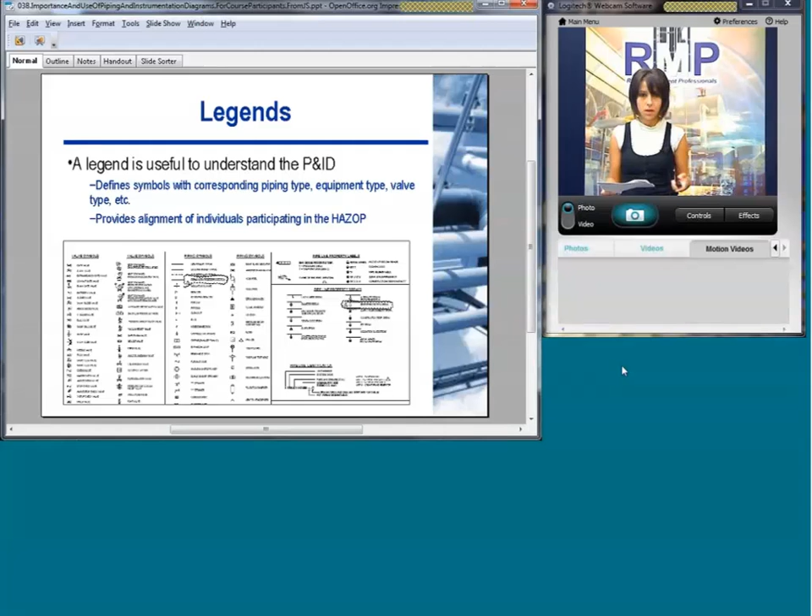Piping: you're going to have common line symbols, and these define the differences, whether you're looking at existing process equipment or piping to be demolished, if you're looking at any heat tracing in your piping, and for your instrumentation, if you're looking at electrical signals versus pneumatic lines, and the connectors - where you're going. For larger scale projects, having the connectors properly defined is really important, because you need to know where you're going in order for the HAZOP study team to fully define a scenario and understand what the process is and where it's going.

So having those really clearly identified is critical, and should definitely be verified before issuing these as the P&IDs that will be used for the session.

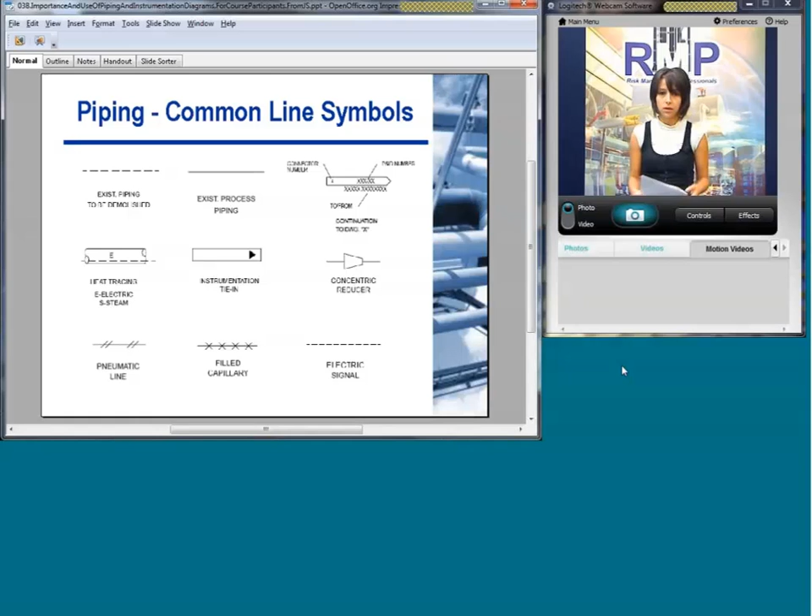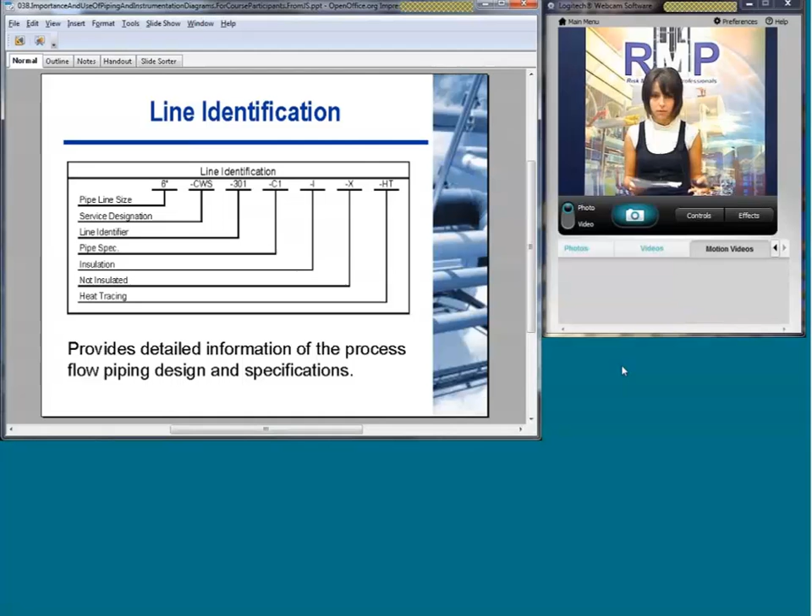Line identification gives you detailed information of the process, flow piping, and design specifications. This is critical so that you can match the piping to the service and the design limitations and specifications.

Valves. The valve symbology - you're going to have different types of internal mechanical configurations. We're just going to outline some samples of symbology. Again, your legend is the one to provide you with information as to what it actually specifically means to your facility. We'll see some examples of confusion in just a second.

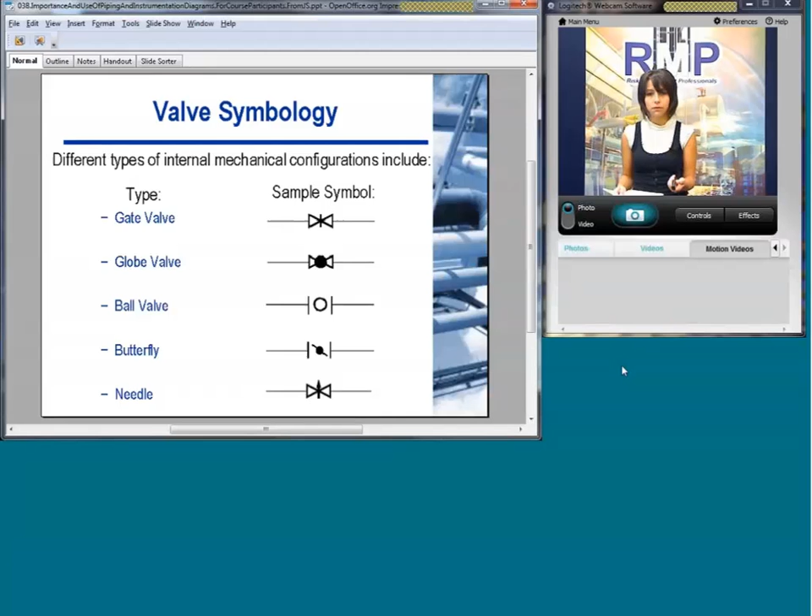But you're going to have your gate valve, globe valve, typical ball valve, butterfly, needle valve, and there are different sample symbols - this is one example set. You can also have multi-port valves in your process, angle valves, check valves, pressure relief valves, and those are sample symbols.

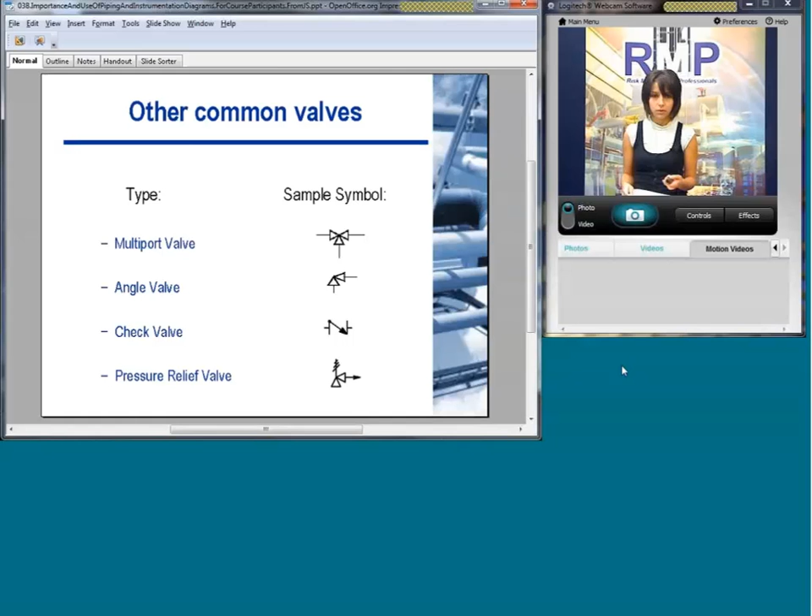Another thing that should definitely be defined on the P&IDs should be the valve conditions - whether you have a normally closed valve, normally open valve, a locked open valve, and a locked closed valve. The reason why these are so important is because this really helps synchronize the team.

Specifically speaking for the locked open or locked closed valve, why are these locked open or why are these locked closed? And also to help identify if there are some valves that are not currently locked closed or locked open, that should be critical valves evaluated before someone thinks about closing or opening that valve. That should definitely be something the HAZOP team can identify during the study and make a recommendation as necessary.

So when you don't have these valve conditions assigned, it really just leaves the team open to not consider those considerations. It's easy to overlook, but it could be a very critical feature for the process. Mispositioning some valves will have a higher degree of risk than others, so designating and defining between the two is very important.

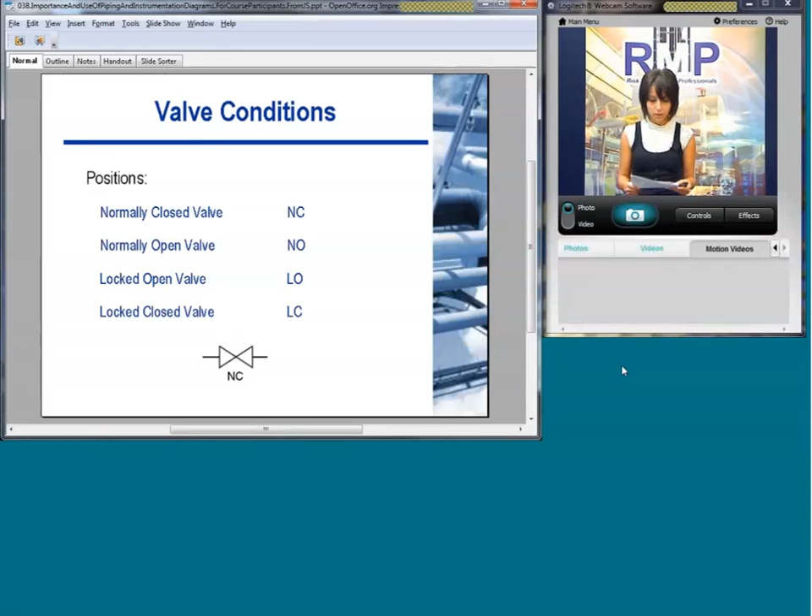Variance in valve designations. Here we outlined a sample of how this works in conjunction with our legend discussion. We show from the left to the right a closed valve, which can be considered the same as a normally closed valve, but depending on what P&ID you're looking at, it can be represented in the same manner. Some things we have seen have been like globe valves, third from the left, and then a globe valve also designated as what could also be considered a closed valve.

So it's very important to have the legend so that everyone's synchronized and understands what it is that you're looking at when going through a HAZOP. It also helps keep the team focused, because if you don't have that, everyone's on different pages, and this could confuse what the process flow is.

People may have a misunderstanding of how the process is working, which then translates to a HAZOP study that's not very good quality, or a lot of confusion for the facilitator and for documentation purposes - getting to fine-tune a consequence if everyone's on different pages can be a big challenge.

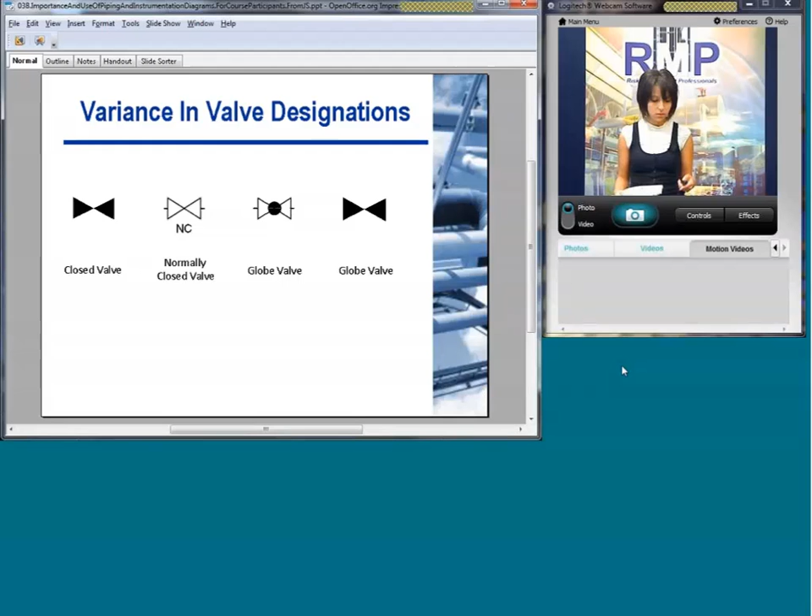The valve failure modes are another critical item that should be designated on P&IDs. These are the fail positions that are common: fail closed, fail open, fail last, fail in place. This is very important to have as well, because failure modes are one of the considerations during the HAZOP study.

What happens if you don't have this - just like if you don't have the normally closed, normally open designation on your P&IDs - if this is not identified, it can also be overlooked, and this can sometimes be a very critical item. So sometimes it's pretty obvious what needs to fail open, what needs to fail closed.

But if you have a control midstream in your process, maybe someone designed the fail open for considerations upstream, but didn't necessarily look at the considerations for that same failure mode and how it impacts downstream. Maybe downstream impacts are more severe if you have that type of failure mode.

So it's very important to identify these failure modes, because what we're looking at during the HAZOP study is for these things. We're going to look at failure modes, and we're going to look upstream and also downstream. That's where, if anyone didn't consider all the possibilities and how they impact upstream and downstream, this is a place to do that, and you have the proper team members in order to make that evaluation.

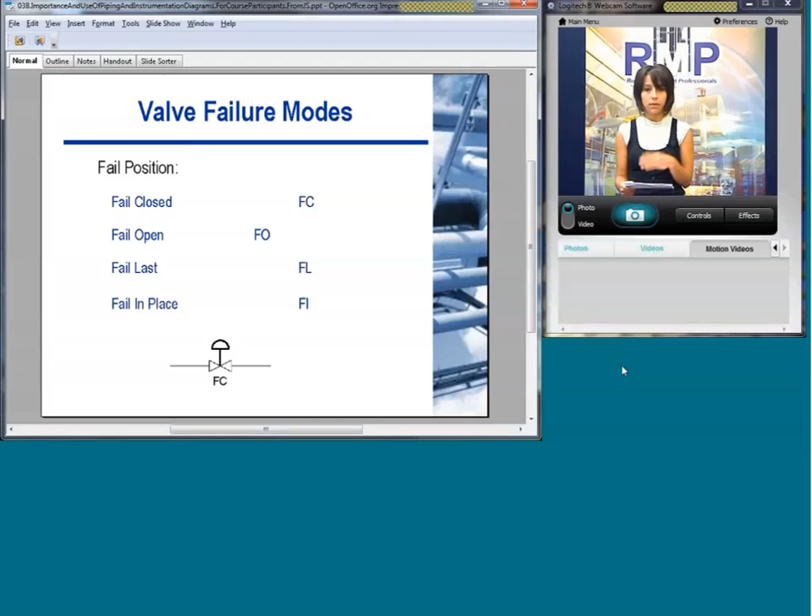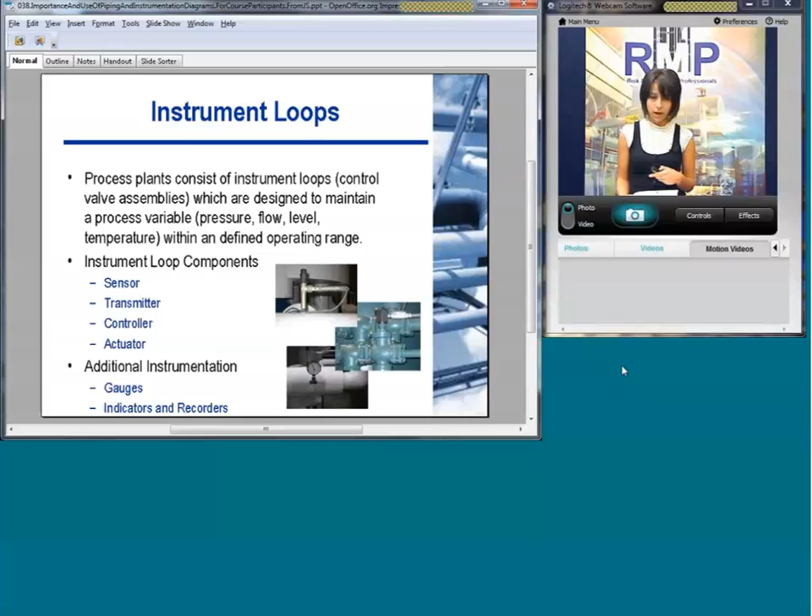Instrumentation is going to be our next topic. Process plants consist of instrument loops or control valve assemblies, designed to maintain a process variable such as pressure, flow, level, or temperature within a defined operating range. The control loop components include the sensor, transmitter, controller, and actuator, all of which should be defined on your P&ID. Additional instrumentation that should be identified on the P&IDs for a HAZOP includes gauges, indicators, and recorders.

There are some sample symbols for the type of actuators. You can have solenoid, diaphragm, motor, or piston, and it's important to have this on there because it shows what the driving force is and can provide some insights during the HAZOP study.

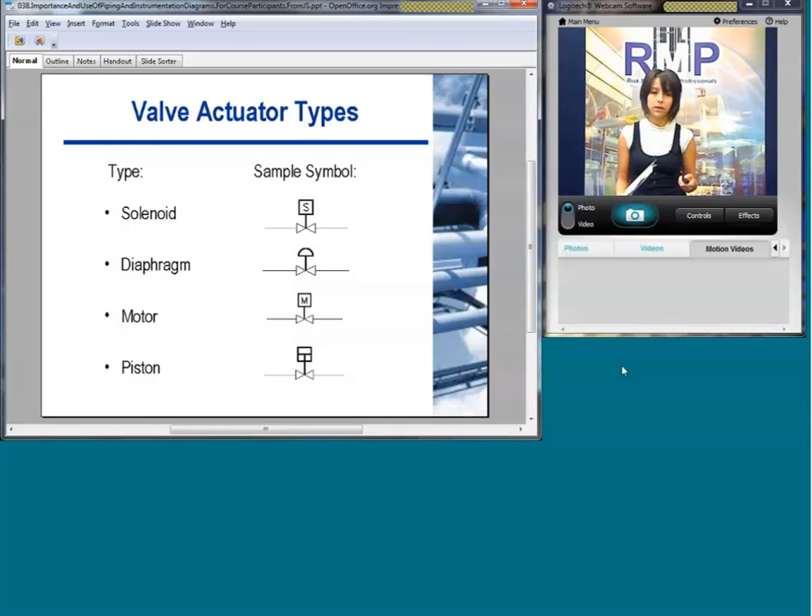Instrument identification and tag numbers are important for communication on your P&IDs. You will have your instrument types, so if you have a temperature transmitter, there are certain symbologies that we'll look at samples of in the next slides. The sequence tag numbers need to make sure each instrument has its unique tag number to avoid confusion, obviously.

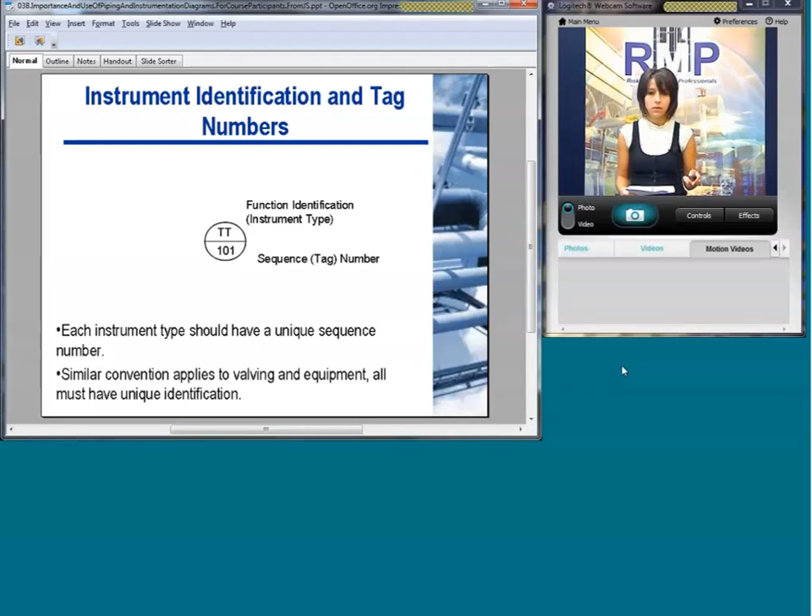And the instrument nomenclature, this is just going to be a sample, so you'll have analytic, flow, level, pressure, change in pressure, temperature, etc. There are certain codes and nomenclature that you can use, and again this should be defined in your legend. Going back to our previous example, we had a temperature transmitter. So if you're looking at temperature, your element type would be T, and transmitter T. Whereas if you're looking at a controller, it would be temperature controller, so TC. That's a sample of the nomenclature. You should have one so that you can properly communicate what type of instrumentation you're looking at, what that instrumentation is doing, and how that's controlling your process.

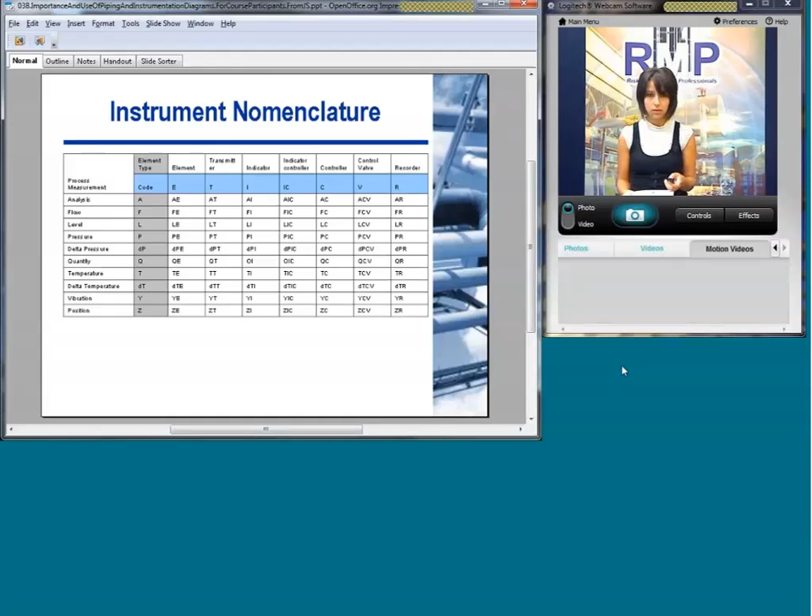More examples. An instrument loop example would be having your flow valve with your flow controller and your flow transmitter, with the appropriate line sending the signal. So you have your pneumatic line with your electrical line going to your flow transmitter and your flow element. And if you have any interlocks, designating the interlock numbers, which is not depicted on this example.

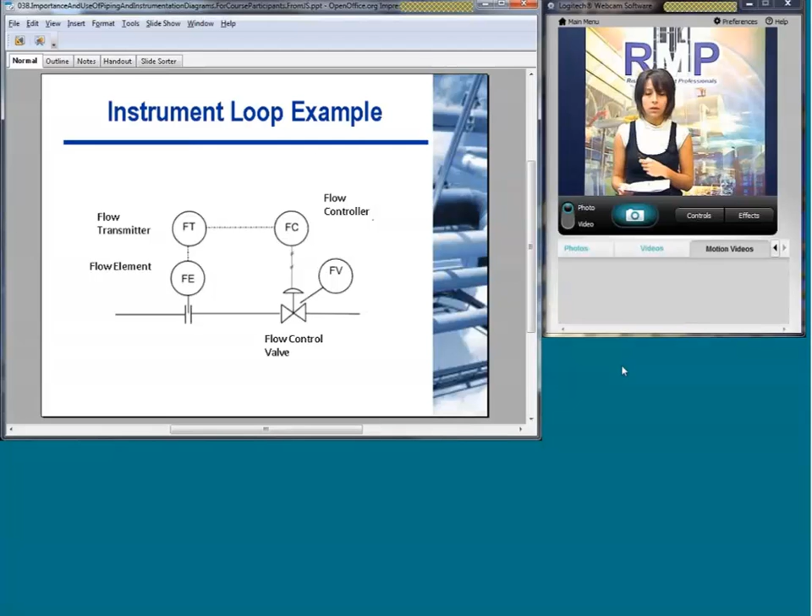Going into equipment, we talked about this a little bit previously. For your equipment, you'll have key process equipment, which can consist of accumulators, separators, reactors, fractionating columns, heat exchangers, air fin coolers, heaters, compressors, and pumps. You may use some or all of these depending on what process you have and what type of process you're evaluating during your HAZOP, and you may have different symbology depending on your facility. This ties back again to the legend, which is important to have so that you can properly define what you classify as your equipment.

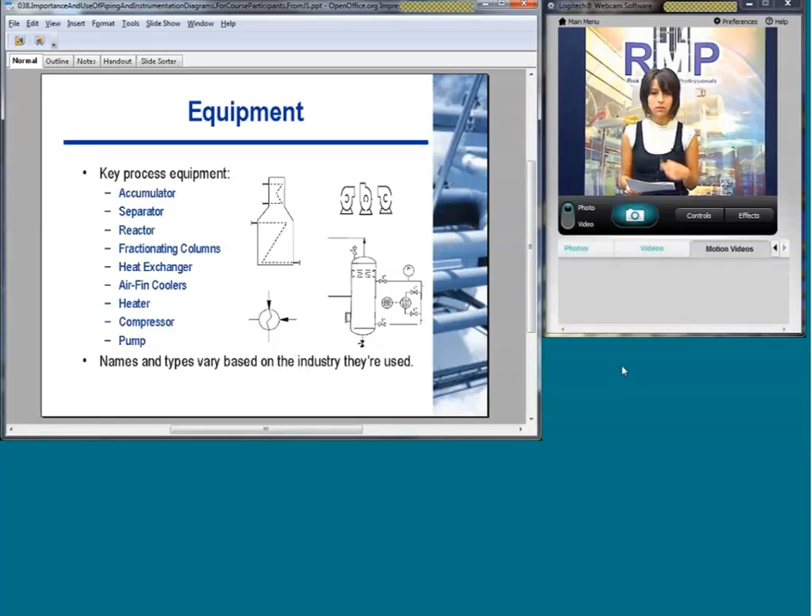Use and importance. The importance of quality P&IDs during a HAZOP study is what we're going to go into.

Accurate and detailed P&IDs allow for high quality and efficient HAZOP sessions. Just elaborating a little on some key topics, it enables the team to better define and evaluate scenarios, because it serves as the communication factor.

Having highly developed P&IDs with the adequate amount of information really helps the team identify what is there, and also focus on design limitations and improvement areas. If it's a very vague P&ID, it's hard to do that, and hard to come up with valuable recommendations. So a high quality P&ID gives you valuable recommendations versus recommendations that just need to be verified.

If your P&ID is lacking a lot of information, there's going to be a lot of unknowns. The team won't be able to develop valuable or accurate consequences and safeguards, and there will be a lot of questions and assumptions. Those assumptions ultimately result in recommendations that still need to be verified, so you need to reconvene and look at this again. It's a combination of wasted time and a low quality HAZOP report that you get when you don't have accurate and detailed P&IDs.

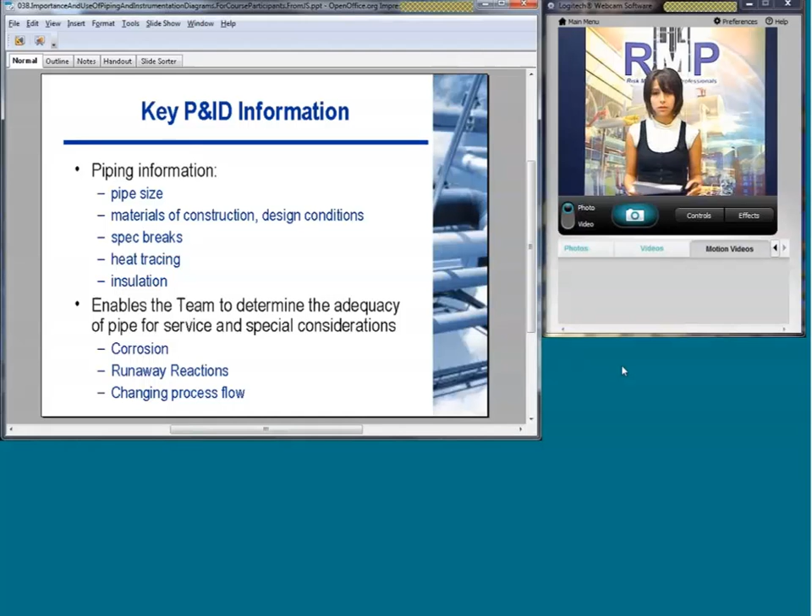There's a balance between how much information you want to put on your P&IDs. You don't want to clutter it or overwhelm the sheet with information, so you want to keep it limited to maybe the elements defined here. But having that information readily available during the HAZOP study for team members to look at and consciously consider as they're developing consequences, scenarios, and safeguards really helps achieve a high-quality HAZOP by keeping people focused.

And if there are any additional considerations, because now they've observed something that may be cautionary, you can refer to other documentation. You can refer to your process safety information, and you can refer to any other cause and effect diagrams for further evaluation. But having that information right in front of everyone makes sure that people are conscious of the design considerations.

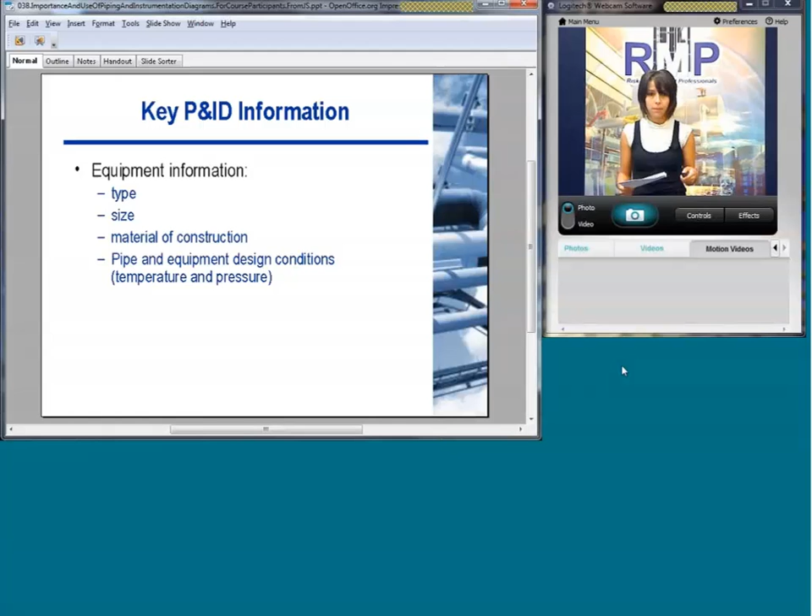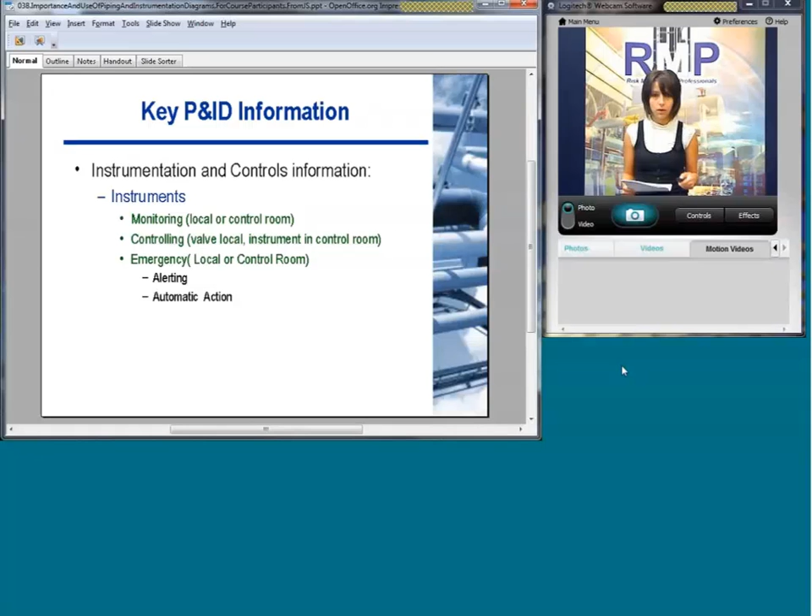And what this does is it helps define the process. It enables the team to verify the failure modes, and it enables the team to understand control interlocks. We have an illustrative picture of how we're utilizing the instrumentation, the nomenclature, the failure modes, and what safety systems you have in place. It provides a comprehensive picture of what's going on, and it enables the team to understand and properly document during a HAZOP.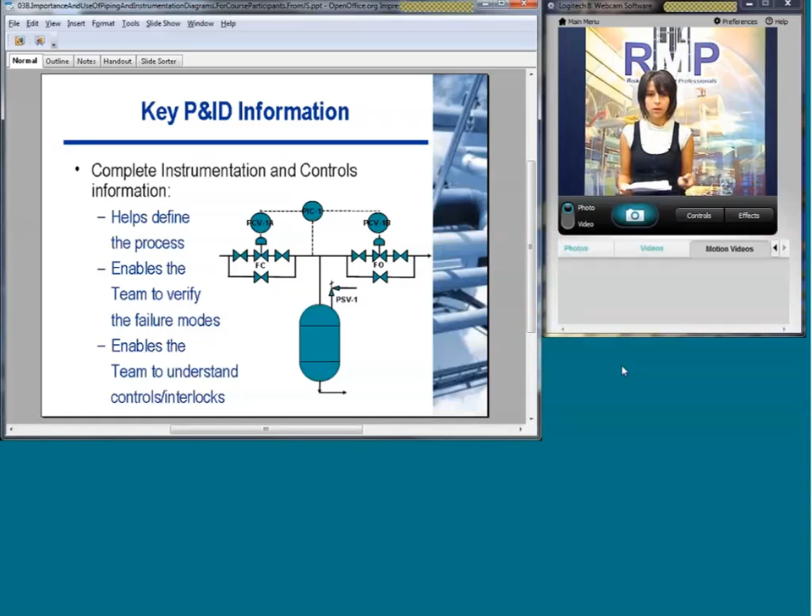Safety systems information—relief valves, your flare systems, emergency trips and actions—should be included as part of the P&IDs, and information on the settings and actions of the safety systems should be identified, whether on the P&ID or through supplemental information.

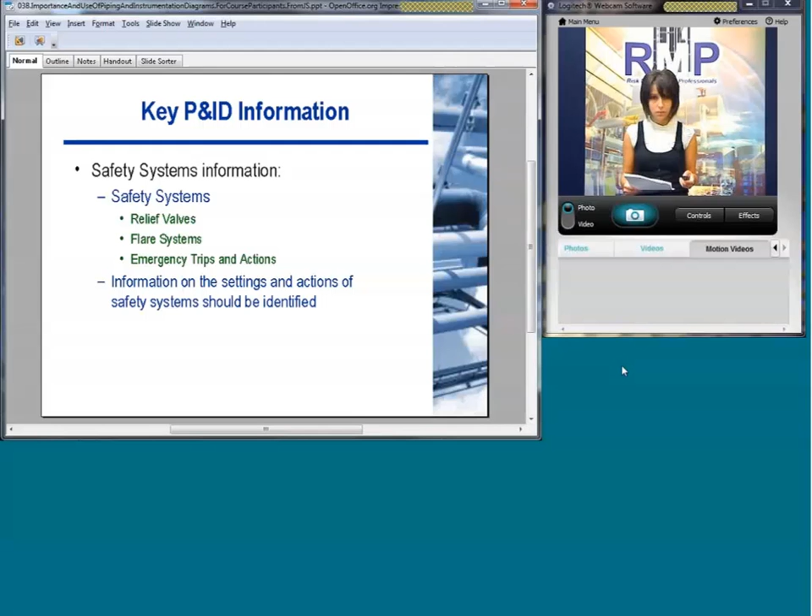Signs that the P&ID has not been field verified will include an inaccurate P&ID, which essentially makes it an invalid HAZOP study, because if you have a missing piece of equipment, that's not going to be okay during the evaluation. Not preparing and not having those P&IDs readily available will surface pretty quickly during the HAZOP study and will result in some downtime and some loss of time.

So indications that a field verification is necessary: again, revision blocks and dates on P&IDs are not current. You start talking during the HAZOP study, you start discussing what changes have occurred, and you start hearing this was changed but it's not reflected on the P&ID, or the time frame on the revision block doesn't match up with what everyone is saying. So those are obvious indications.

Outdated equipment information—sometimes flow streams don't make sense. That's why it's good to have a knowledgeable team, a knowledgeable facilitator of the process, good to understand what's going on, because that usually is a good indication that your P&IDs are not accurate. If someone can identify, hey, this is not making sense, let's take a break, make sure that this is okay, update as necessary, and let's keep moving, because otherwise you start documenting something that's not accurate.

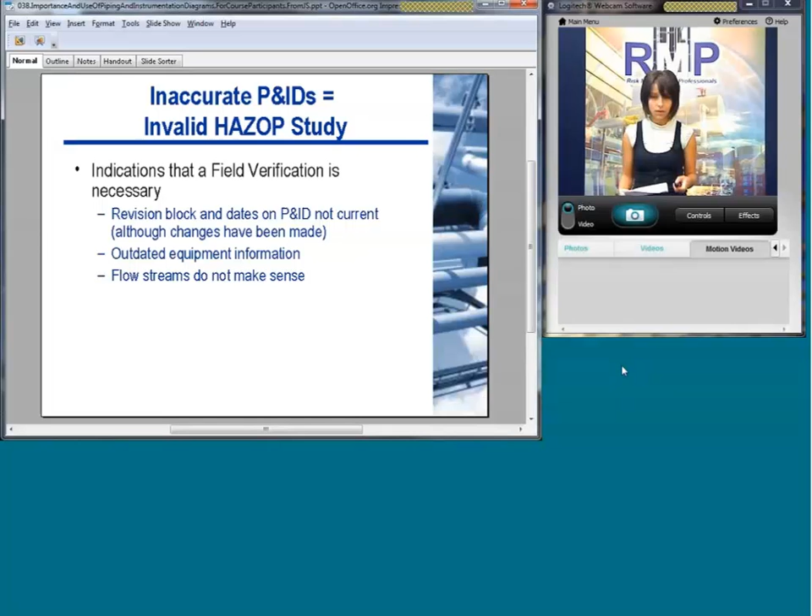Prior to the HAZOP, you probably should do some investigative work—not probably, definitely—to make sure that P&IDs are accurate, because this is the basis. This is what you're going to be evaluating systematically. You're going to go through these as what's out on the field. So it's very important that prior to the HAZOP, you spend some time to make sure that these P&IDs are accurate.

You can do that by reviewing management of change procedures, pre-startup reviews, identifying what types of changes have occurred to the system over time, and comparing against P&IDs to make sure that it's appropriately reflected in the drawings. Another source is obviously operations and maintenance.

You need to interview them, because sometimes you need to have your MOCs in place, but you also probably should double check with operations and maintenance to verify what changes have undergone for the process. And also, you want to update the control summary and any cause and effects diagrams and any supplemental diagrams as necessary. Not limited to the P&IDs, just make sure that all of your maps and diagrams you're going to be using as supporting documentation have been reviewed in a timely manner prior to commencing your HAZOP.

And also, after doing all this, it's very important to really field verify. If for some reason you probably should do a spot check before you decide whether you're going to establish these are updated P&IDs. Pick a section of the system, go out there, and even though you think they're 100% updated, just go out there, do a spot check, compare what you have outlined on your P&IDs to the process. And if you see any changes, it's probably a good indication that you should field verify fully your P&IDs. Do this with enough time, set a realistic timeline for it, and make sure that they're updated, because otherwise it really translates into wasted time during the HAZOP study.